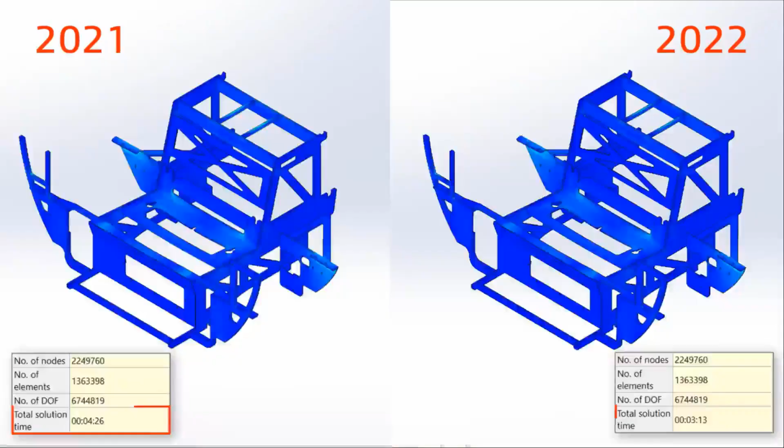Hello SolidWorks community. SolidWorks 2022 is just around the corner. It features many enhancements to help you work smarter, work faster, and work together. We have focused on quality and robustness, so your tools are more reliable than ever. And of course, many new features you won't want to live without.

This year we feature a long-time customer in the Netherlands, U-Boat Worx. This fall, they are launching their Nemo submarine. It is one of the most sophisticated pieces of underwater tech available to consumers. It's an award-winning, revolutionary design and personalized for individual use. We are so proud to be part of their innovation, as well as your next great project. For now, sit back and take in everything new in SolidWorks 2022 and the 3D Experience Works.

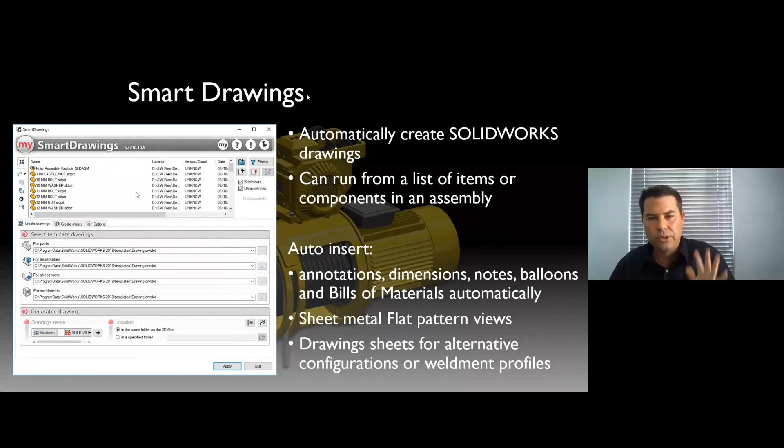So I just want to show you what myCADtools is and what it means to have a myCADtools app. This is a little application that can open, and this is a tool called Smart Drawings. This is one of the 50, and it automatically creates SolidWorks drawings. I know this sounds like what we've had with predefined views, but a lot of you would have identified with the fact that if you've got a predefined view with some model items, put a drawing view in, put a model in and throw some dimensions in, it's more of a gimmick than anything else. It doesn't really work.

So what Visiativ did with their apps is they actually went and created a full interface, and I'm going to show you how this works. It's really, really impressive. So what we've got is the app that we load inside of SolidWorks, and you can actually go in and select, add the current model that's open, so whatever SolidWorks model you've got open, it'll automatically bring it into the tool.

Now the tool also allows you to go in and select as many parts or assemblies as you like, and it'll go and bring all of its children across, and you'll be able to create drawings from those parts - sheet metal parts, weldment parts, assembly parts. It doesn't really matter. You can even go and select folders.

Then you've got options to create or use templates - templates for sheet metal parts, assemblies, and drawings - and you predefine that and use it for your company standard. Then we're going to look at ways to name those drawings, and again you have options for your naming conventions. Then we'll select where we'd like to place the location of those drawings after we've finished.

Now we've got selections for options for dimensioning. Do you want to use automatic dimensioning? Do you want to use model item dimensions? What kind of annotations for parts, assemblies, drawings? You've got a lot more control as to what kind of information you want on those specific drawing views. Then you can select from the drawing objects, assembly objects, dimensions, weldment cut list templates, location of templates, bill of materials templates, anchor locations. The amount of options is crazy for this, which gives it the power.

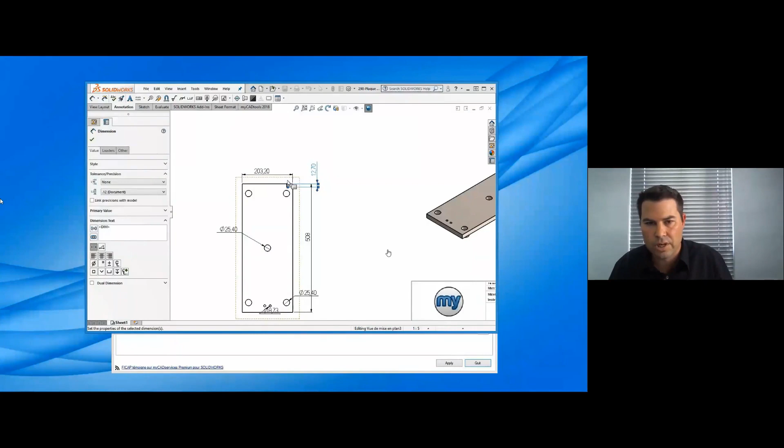So for real basic sub-assemblies, instead of letting your design team go and create all of these things manually, use a tool like this to push out drawings really quickly. I think you guys are going to get a lot of value out of that.

Then these are my two favorite ones: sheet metal manufacturing and cutting optimization. Sheet metal manufacturing takes a sheet metal part or an assembly with sheet metal parts in it. It goes in, opens up each sheet metal part, creates a DXF of that, and saves it in a folder for me.

So I'm actually going to do that one live. I'm going to move over to SolidWorks and show you how this works. If I've got an assembly here with some sheet metal files inside of it, there's a myCADtools app that you just start, and then you go to the button that says sheet metal manufacturing.

It's going to go look at the sheet metal files inside of my assembly. It looks at multi-bodies inside of the parts, so if I've got a sheet metal body with multiple sheet metal parts inside, it will extract all of those as well. You can see it actually lists it here as an item, and you're welcome to go look at a preview or open these up as you like. You'll see the quantities listed, the thickness, the material, and the configuration as well.

I'm not going to spend a lot of time, but you'll get the idea that I can go and select tons of options: file names, properties, how this thing's generated when pushing out a DXF file of all the sheet metal files. Do I want a DXF or DWG? What scale do I want? Do I want an isometric view above? Do I want the thicknesses grouped in a single file, or multiple files for multiple thicknesses? Do I want to export the geometry only, sketch lines, bend lines? It's really as easy as that, and you've got all of these options here, which I just push apply.

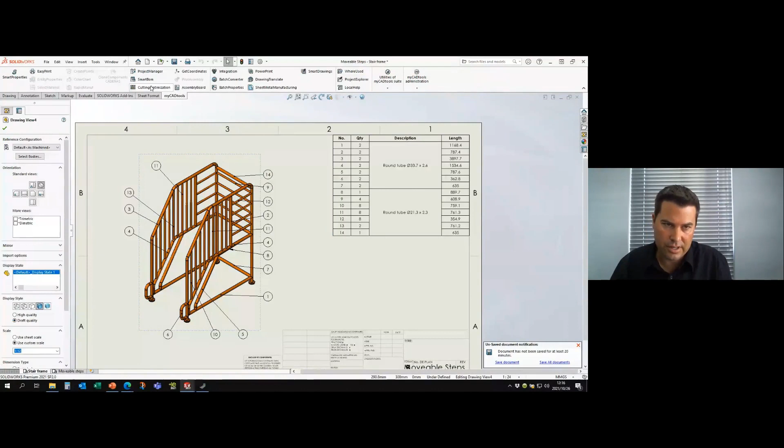And then you can go and make a new project and give it names and titles and project names and all those kinds of things if you like.

But I'm just going to go here and say import a SolidWorks table, and it's going to go and ask me for a SolidWorks weldment cut list here. I'm just going to select that, and it says there's a round tube there and a round tube of 2 different profiles, and I just say okay.

It says some of the lengths are the same, do you want to merge them? Yes, that's fine. And you will notice now that the tool has done this for me where it's asking me to have a look at the information of my cut length. So you can see I've got that profile over there and that profile over there with these amounts of lengths and quantities. Very easy.

What I'm going to do here is go and define the profiles. Each profile will have their own tab. And I can then say I want to optimize. I can buy material at 5 meter lengths and maybe up to 9 meter lengths - I've got a very generous supplier who can give me 9 meter length tubes. And then I need the increment in 500 mil.

So what I'm going to do is tell SolidWorks or myCADtools to go and optimally nest and figure out which is going to be the best size raw material to go and order. It actually tells me that 6 meters is going to be the optimal size that I need to purchase in order to nest those.

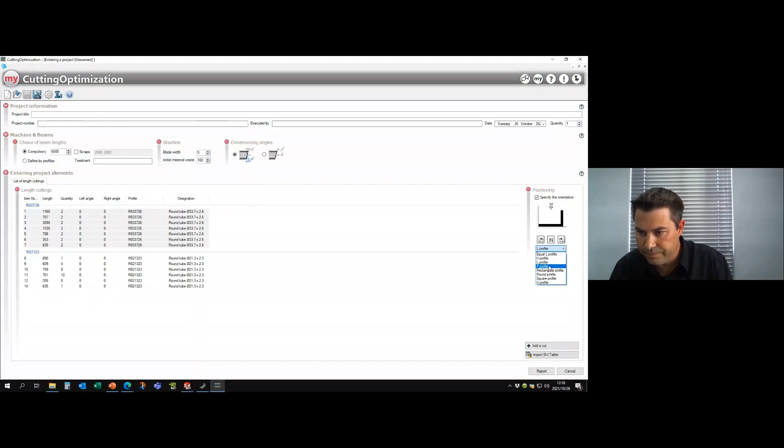Round. And I'm going to do round again. Then I've even got options to do blade width - I can choose the blade width of 5 mils, the initial material waste, so I can do the calculations of that. And then I'm just going to say report because I'm running out of time.

I just want to show you what this does - check this out. So what it's going to do here is give me a profile of my cutting. It's going to tell me I need 6 meter lengths, and these are the quantities. And then if I go down, it's actually going to nest the tube. It tells me I need 4 lengths of 6 meter tube, and I need 2 quantity of that length, and I need to put item number 3 from my bill of materials over there, and then item number 1, item number 5, and then it's going to nest it as well.

Item number 4, 4, 2, 2, 7, 6. And then it even goes as far as telling me how much scrap material I'm going to have left over per tube and in total.

So from a manufacturing point of view, I believe this is an incredibly handy tool. Instead of spending hours trying to calculate this by hand, you can use this to generate a cut list and provide this to your operations team. And that's really, really handy.

So that's a brief, fast introduction to the tool from my side. So what I'm going to do is stop sharing for a second.

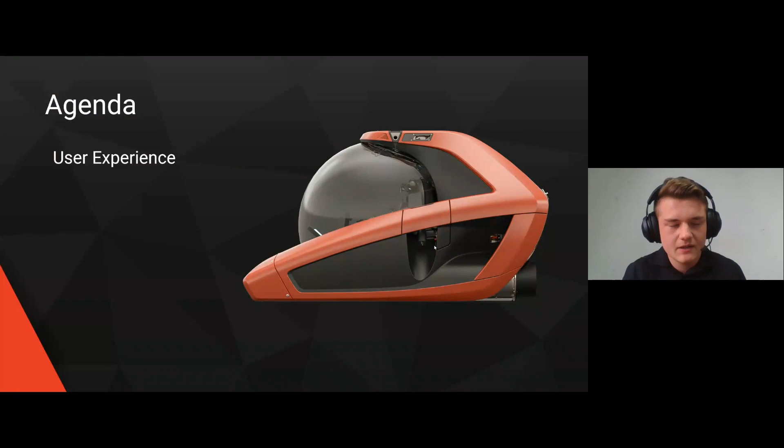So just to give you a brief agenda of what I'll be showing you today: user experience changes, parts, assembly performance, assembly features, drawings, imports, and finally our graphics.

So now diving into our user experience, you'll see what's new in 2022 is the ability to use the command search in your shortcut bar itself. There are also some changes to the coordinate systems, which will be shown, as well as the reference geometry shortcut, which I can tell you right now is one of the best additions in SolidWorks 2022. There have been changes to the system options info, dismiss messages, and our notification and message bar styles. You can now also view the progress within the pack and go feature itself.

In this case, I'm going to click the S key to access my shortcut bar, and by typing in coordinate system, SolidWorks will automatically show this feature for me. So now you don't have to go to your command search bar on the top right-hand side each time you want to search for a feature. You can choose to insert the command by itself or to show the command within SolidWorks. This is especially useful for those users out there who are just getting started with the program.

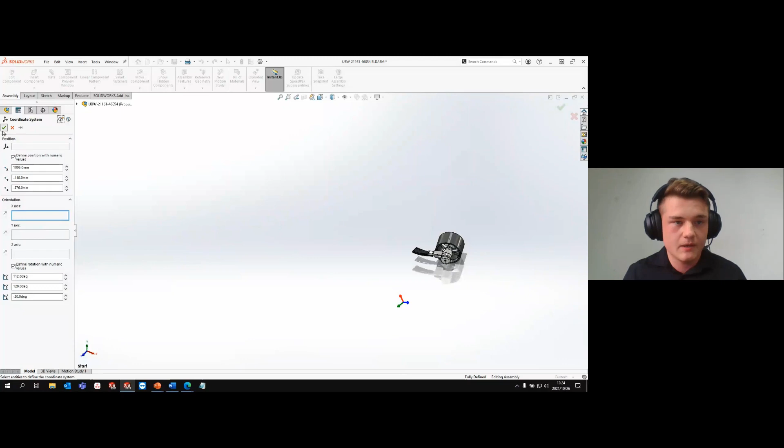Since I know it's under reference geometry, I'm going to select the coordinate system. You'll now notice in SolidWorks 2022 the ability to add your numeric values and rotation values to your coordinate system. In this case, I'm going to populate it with these rotations, since the team has gone ahead and worked out the exact position of our thruster. Notice how it changes as I insert these as well. By clicking OK, SolidWorks inserts this coordinate system for me.

Now, for those eagle-eyed among you, you'll notice some changes to the graphics aspect of the coordinate system. You now have these lines on each side of each axis, and this indicates that you can select a plane on your coordinate system itself. To show this quickly, I'm going to go to my heads-up view toolbar and select the coordinate systems option. By hovering over these, you'll see they actually highlight in orange. This allows you to select both the origin within the coordinate system, your faces, and your axes themselves. By right-clicking on the face, you can now add a sketch to your coordinate system.

Now you don't have to use your reference geometry and create a plane that way. SolidWorks 2022 allows you to use this method directly from here. But what happens if you have so many origins and so many planes that you don't want to use the heads-up view toolbar and select these options every single time? Well, now in SolidWorks 2022, if you press the Q key, SolidWorks will temporarily show all of these features for you. If you left-click somewhere else, it hides it.

So in this case, I want to add another thruster. I'm going to control drag this component, press Q, control select both the component and my coordinate system, and add my mate using the quick mates toolbar.

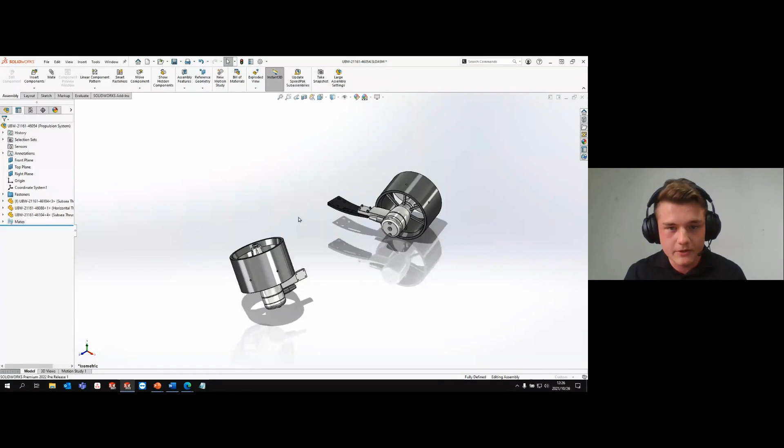Now to get it to the other side, I'm going to use my shortcut menu again, select mirror components, press Q, and select my right plane again. It's as simple as that. Right click and confirm the change.

Okay, but now the manufacturer also requested that he needs separate access to each file. Now we've all been used to using the pack and go feature, but what about the users out there who are working with these massive assemblies?

Well, now new in SolidWorks 2022 is the ability to see a progress bar on the bottom left if your assembly is busy with the pack and go feature. This especially makes it very useful for those users out there with massive 10,000 component assemblies. You'll now be able to see how far it is along the process. Click Save, and SolidWorks did that for you. In this case, it did go quite quickly because this is a very small assembly.

Now, just looking into the system options, as I told you, there were some changes to the dismissed messages. Under the system options in your messages, errors, and warnings tab, your dismissed messages are no longer located at the bottom. It's a completely separate tab, and this also allows you to hover over them, and SolidWorks will display a brief message to indicate what that message is all about. Just for those users out there who might not know what this entails.

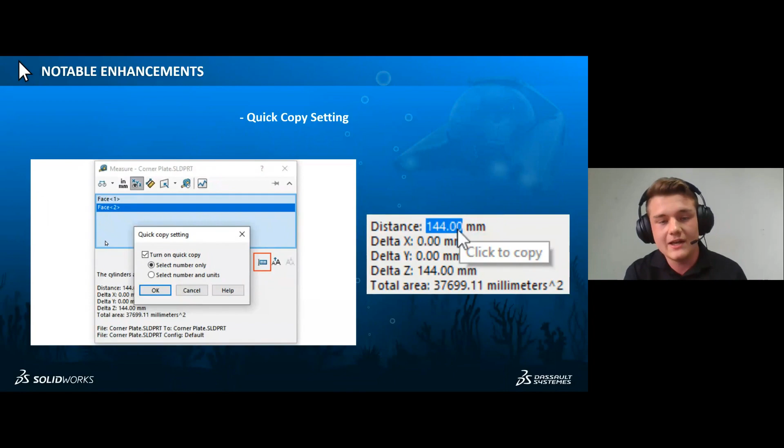The quick copy setting is finally back. For those users out there who use this in SolidWorks 2020, SolidWorks has introduced this again in 2022, now allowing you to copy the distance or the number only, as well as the units, by just simply left-clicking on it and copying and pasting it.

Before we continue, I'd like to take a deeper dive into your thoughts on the new coordinate system in SolidWorks 2022. Would you use the new coordinate system to create sketches? Feel free to answer this in the poll.

Me personally, I think it's a very interesting one. We've all been used to using reference geometry when creating planes, or also using our existing faces.

Quentin, what are your thoughts on this new coordinate system? I actually think there's a few enhancements as well for mating with coordinate systems in 2022. They're definitely listening to feedback from people, and I really like this. Coordinate systems get used a lot, and it's been many years since it's had an overhaul. This is very, very good, and it makes life easier for designers at the same time.

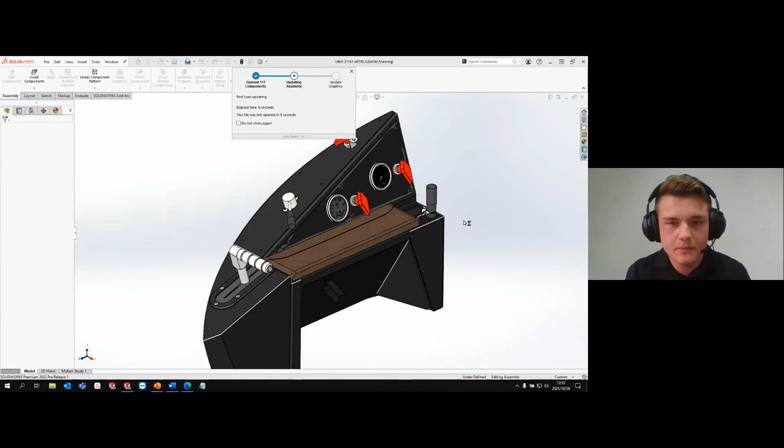To demonstrate this, I'm going to open up the dashboard located within the assembly of the Nemo. Just give that a second to open up. The Nemo was designed by a company called U-Boat Worx in Switzerland, and they design quite luxurious products.

Looking at these handles, they look quite simplistic, so they require some changes. I'm going to open up that part and start editing. On the left-hand side here, my solid bodies, you'll see these are BREP bodies. For those who don't know, BREP simply stands for boundary representation bodies, and this was imported from a STEP file.

Boolean operations are no longer required when working with these BREP bodies. To showcase that, I'm going to use my shortcut key, select chamfer, and add a chamfer on the right-hand side here, typing in 2 mils.

For those who don't know what Boolean operations are, it's simply the term used for when working with either dumb solids or general advanced part modeling techniques. If you want to learn more about them, feel free to come to our MECAD training where we can explain more about this.

Now we also want to add the logo here at the top. I'm going to select the sketch and perform a boss extrude of about 1 millimeter in depth. Notice how quickly it did that. I can now simply use one of the features in SolidWorks on a body or part that wasn't even made on this software.

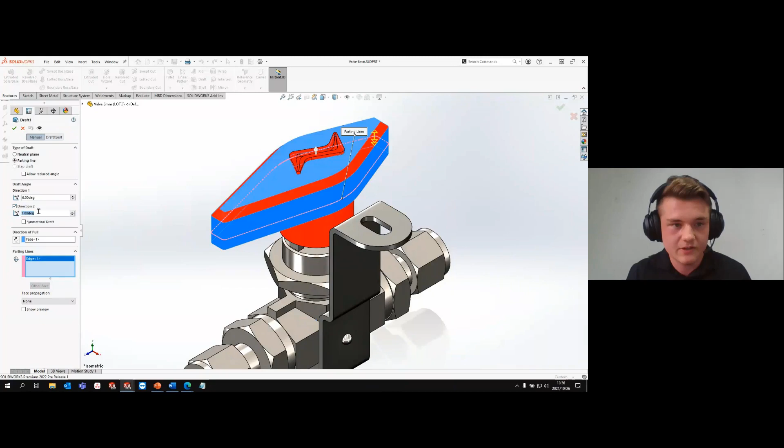Simply select your plane, select your face, and after it's been created, click shortcut, select draft. In SolidWorks 2022 you can now add your draft in two directions at the same time. By specifying my direction of pull and my parting line, in this case my split line, inserting my angles, 6 and 3, and clicking OK, SolidWorks automatically puts that in for me. No longer do you need two separate draft features—SolidWorks can do all of that for you in one.

I'm also going to add a hole here on the top, so I'm going to select my planes, click on plane 1, and select hole wizard.

Now new in SolidWorks 2022, when using the slot hole method, you have a new dimensioning scheme. You can choose between the centers or from the arc lengths. In this case, I'm going to specify my type, go to my positions, and select my location. By using the tab key, I can toggle between both the horizontal and vertical orientation within a few clicks.

Okay, in this case, let's try that again. Simply select your hole wizard, your plane first, and there you go. It inserts it for me.

In this case, I'll show you the hole then after these presentations. I'm going to save this and perform a brief pack and go of the part itself.

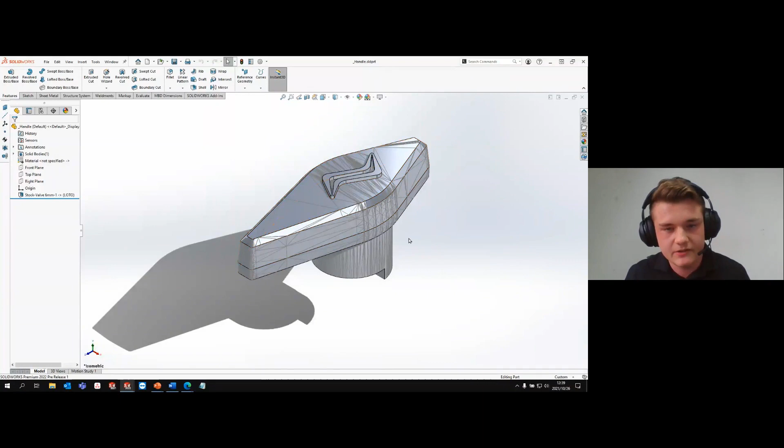So now quickly just to demonstrate what that looks like, I go to my pack and go folder again and select the handle option. It'll briefly display what this model looks like. Now you'll see these gray facets here on the right hand side. Currently in 2022, there is no option available to hide these facets. The only way you can hide them is by right-clicking on a face that's discrete in this case, and selecting the change transparency option. This is especially useful if you want to show your products to your clients briefly whilst you are in SolidWorks.

I'm going to save this and return to my assembly. Now I'm going to showcase to you the new sectioning method as well as the stud wizard. So for that, I'm going to select the handle, open it up, select my section method, and then you'll see here, new in SolidWorks 2022, you can now select a cylindrical face or an axis when viewing your models. It automatically updates as I move them, just like it would with the other sectioning methods.

Okay, this part does need some threading though. So I'm going to open it up and change the existing thread method that they have there. Now notice with these threads, for those of you who use the thread feature, it can slow down the performance of your PC. That's why we would recommend using your cosmetic thread features rather than the thread feature itself.

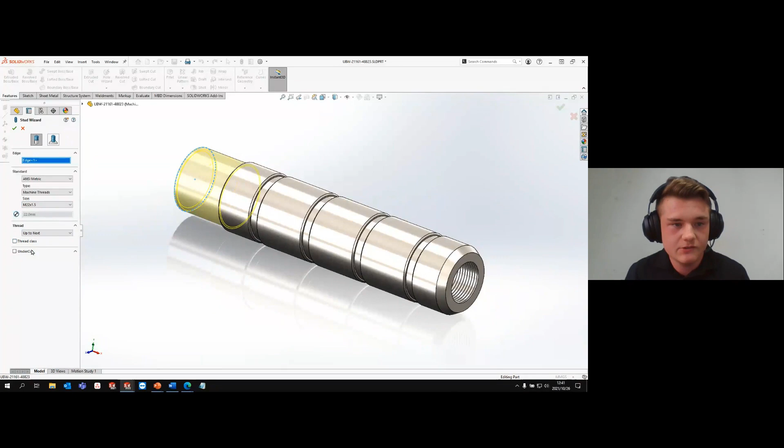So I'm going to suppress this, and under my features, hole wizard, I can now select the stud wizard option. Just by simply following the same procedure as you would with your hole wizard, you specify the stud options and the position. Now in this case, we have an existing cylindrical body, so I'm going to select this edge, and notice how SolidWorks automatically imports the diameter for me. Select my profile. In this case, I'm going to specify it to be M22 up to the next edge, and also insert my undercut. That obviously saves a great amount of time since you don't have to use your revolved cut method.

Okay, but what about the configuration change that I told you about? Well, if I go to my file properties, you'll now notice there are two new tabs: configuration properties and the properties summary. Under your configuration properties, you simply follow the exact same workflow as you would with every other property menu. Select your description in this case. I'm going to type in new thread. Specify it to be only in this configuration. Notice that's also a new feature.

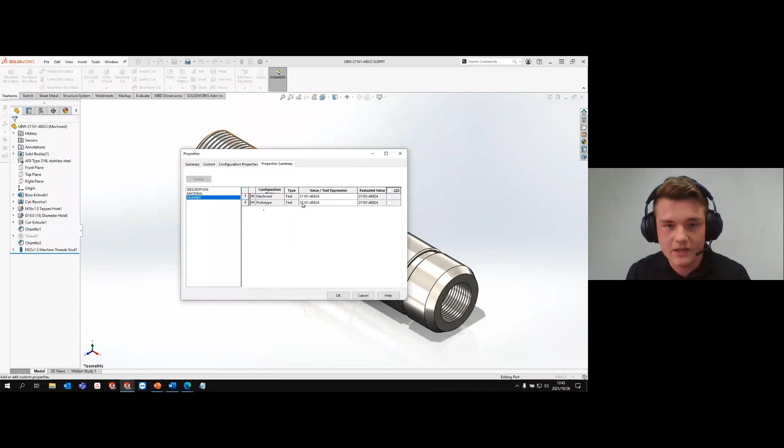And just repeat the process with my material. Select material. In this case, it'll be all configurations. Now if I go to my prototype, you'll see my description is not indicated there. Now, if you go to your property summary, it's basically the reverse. So if I go to my description, it'll show all the configurations associated with that property itself. In this case, I'm going to change the part number. In prototype, it's here. So I'm going to type in 5 at the end and click OK. It's as simple as that when working with the new configuration menu.

It makes life a lot easier.

Okay, I'm going to close these documents and return to my PowerPoint.

Now on to the structure systems. For those of you who don't know what structure systems are about, a link will be provided at the end of the webinar session. Feel free to watch that video to see what this is all about, especially if you don't want to add all these weldment features separately. Structure systems allows you to add all these briefly within a few clicks.

So in 2022, we have a new secondary members option to choose from, some changes to the gussets and end caps, and it's now also supported in structural members. We can also add connection elements now for bolted connection weldments, which is very useful. We can now mirror across two planes at the same time, and we can edit our sheet metal flange profile on a cylindrical edge.

So to demonstrate that, I'm going to open up the cradle for the Nemo assembly. Now, this member here at the back is going to experience quite a lot of force, so for that I'm going to have to add additional members to support it.

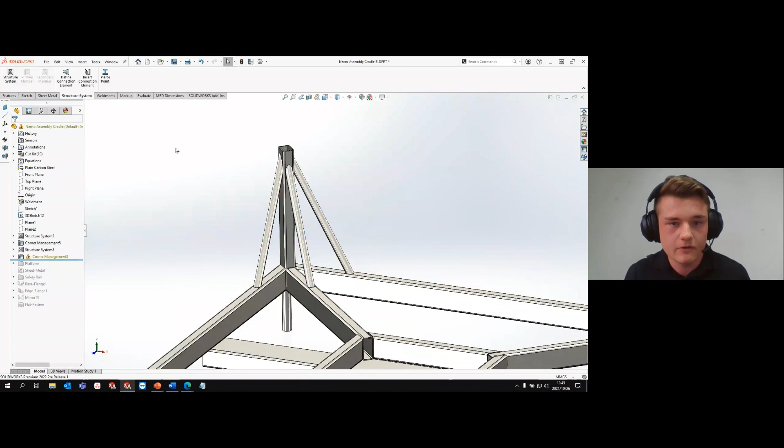By exiting this feature, it automatically goes to the corner management tool. I'm going to specify my trim type, change my trim order, and deselect the allow extrusion option. Now if I confirm that, you'll see within a few clicks it automatically adds these members for me.

Now, what about those connection elements that I told you about? Well, if I go to insert connection element, you'll see here on the left SolidWorks already specified these for me with the standard that they already gave. In SolidWorks 2022, a sample has been included, and there are various types that you can choose from.

In this case, I'm going to select my base plate. My size is plate 100. And then under my placement, you simply select the member that it needs to be placed on, and SolidWorks automatically puts that element in the center for you.

Okay, let's give SolidWorks quickly a brief moment to load. There you go, let's open that up again.

So if you want to change the distance or the dimensions of these elements, you simply pin it to add another one immediately, select your member, and then at the top of the placement property manager you specify your size. In this case I'm going to type in 150, and within a few seconds it automatically inserts that for me. That's especially useful if you want to change your connection elements on the fly.

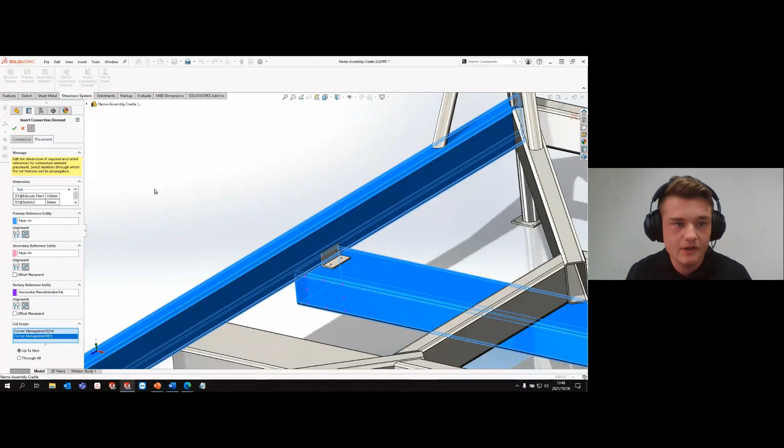By using my tertiary reference entity, by hovering over the member, I can simply select one of the reference planes that appear automatically, and SolidWorks will automatically put that in the center for me. By selecting my cut scope option, I simply click on both of these members and click OK. What that does is it automatically cuts into these two members, making them smart components in this case.

Now mirroring it is very simple. I'm going to use my shortcut menu, select mirror, and by using my new Q key function, I'm going to select the planes that I would like to mirror it upon, select my bodies, and click OK.

If you want to add your gussets and end caps, it's no problem in SolidWorks 2022. You simply go to your weldments, select end cap, and select the end of one of your existing members.

Now I'm going to have to mirror these as well on the other side. So I'm going to press Q again, select right plane, select my top face, highlight my bodies, and right click to confirm. And as you can see, with a few steps, it automatically put that in for me.

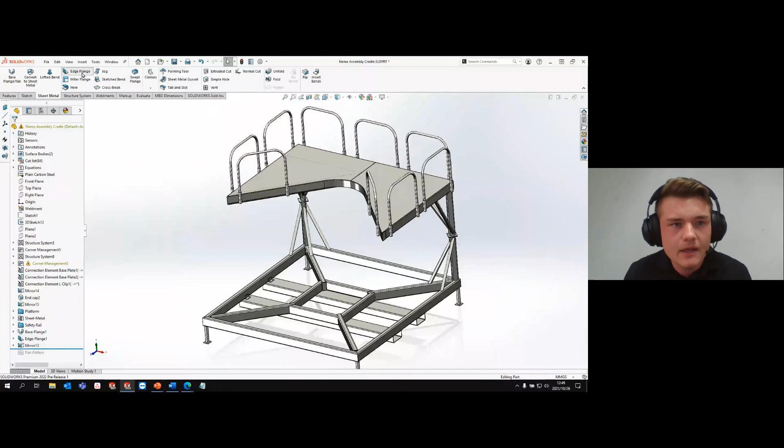Now, just while SolidWorks is loading, Quinton did mention in last year's event that you had the ability to insert sheet metal profiles on cylindrical edges. While now in SolidWorks 2022, you can edit these profiles immediately within the property manager itself. So if I go to my sheet metal and select my edge flange, I can select this option over here.

Select this edge, and now in 2022, you can edit the flange profile from this menu and click finish. How simple is that? It's so great to be able to edit these because now you don't have to flatten them, add your cut extrude, and then fold them back up again. It makes life a lot easier in this case.

Now let's wait for Solidworks to load again. And there you can see it automatically imported for me. I'm just going back to my PowerPoint.

There are some notable enhancements that I quickly want to go through with you. If you use edged contours on bends, it now is reflected in your flattened view in SolidWorks 2022. And this includes your inscribed text or your split line features.

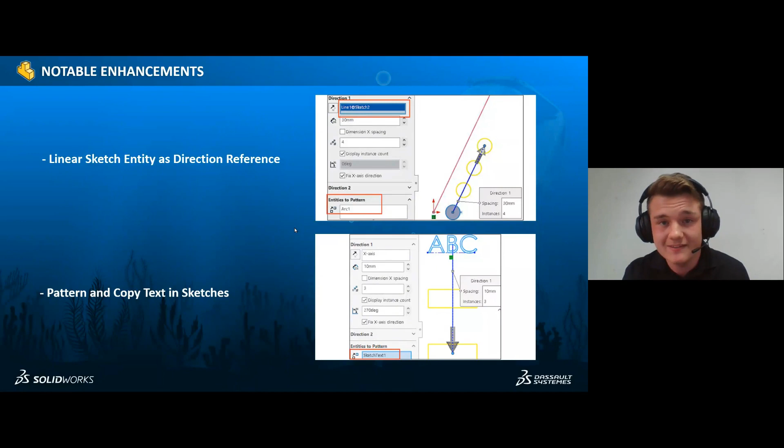If you select your linear sketch entity as a direction reference, it now does not put it in your entities to pattern in SolidWorks 2022. So for those of you out there who use other sketches as reference, you can now immediately perform a pattern using an existing sketch entity itself. And this also includes your copy text, where you can copy existing text within your sketch pattern itself.

There's also additional redo support for parts. So when performing redos, you can now redo changes to the hole wizard, your simple hole, and your linear pattern. And this also includes changes made via the instant 2D command, your reorder features, and your rollback bar. Very, very great stuff, and I'm sure a lot of you will love that new addition.

Now, Quentin's going to launch another poll. I'm interested in hearing your answer for this. Have you ever broken your model using the undo button? Now, I think a lot of us have done that in the past. I'm also guilty of this, especially when showing quick features to your clients and you don't want to close the part. You just want to perform general redos after you've undone them about 1,000 times. SolidWorks did add the additional redo support there for you. So just let me know on the poll and I'll have a look.

Brandon, the guys, we've had about 30% are saying, wow, yes. And then about 60% have said, yes, it lit up like a Christmas tree. And then only 5% of you say, what is undo? I'm a machine, I never go back. Oh, that's awesome. Okay, so there are people out there who would love it. Okay. Awesome. I'll give you about 10 more seconds to answer that, and then I'll move on to the assembly portion.

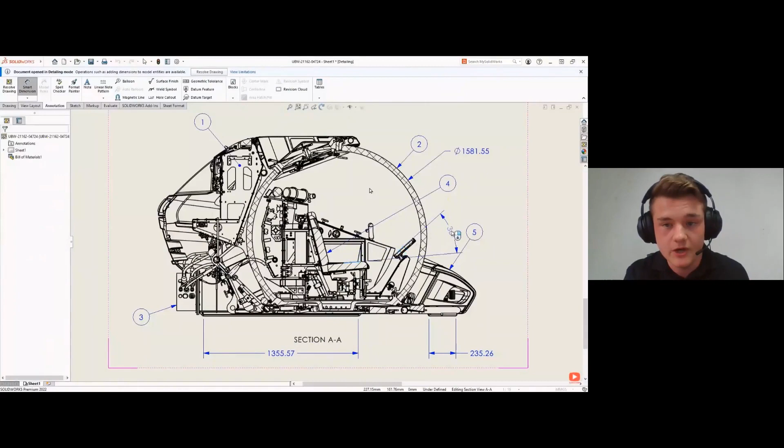Detailing mode also allows you to insert your brief smart dimensions, as you can see here, as they indicate. This also includes your notes, balloons, surface finishes, blocks, and even your tables, which will also be shown as a new addition to drawings, where you can add a whole table within your detailing mode itself.

Now, new in SolidWorks 2022 is the ability to open up your subassembly within LDR, just saving you a lot of time. But it gets better: you can open up your subassembly within resolved or lightweight mode whilst you are in LDR, making it a lot faster when working with these assemblies.

That's the assembly performance. Moving on to the assembly features: if we left click on any component, the move with triad automatically appears. We have changes to the quick mates control, as well as the ability for SolidWorks to automatically determine the seed instance for your pattern-driven component pattern feature. We also have the new configuration table, which was highly anticipated and requested, as well as the exclude component from BOM option, which is in the part itself.

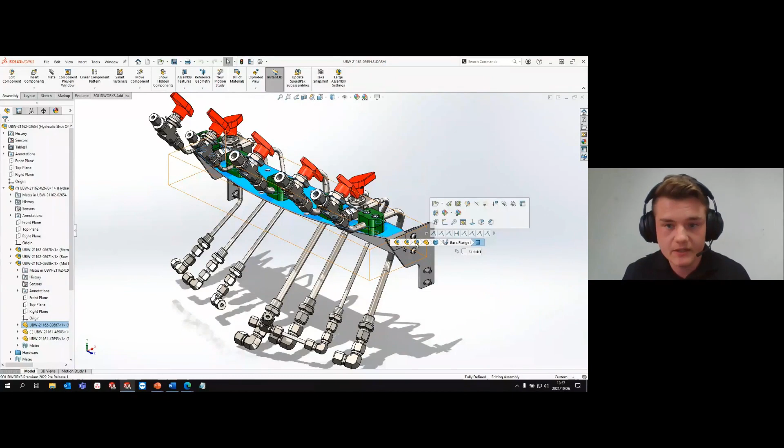So by going back to my SolidWorks, I'm going to open up the piping system within the dashboard itself. This system does require some changes, so I'm going to select this component. For those of you wondering why this breadcrumbs menu is appearing by default, this can be changed within your system options, and you can always press your D key if you want to show it wherever you are clicking.

So using the breadcrumbs, I'm going to open up the subassembly. By clicking on the components on the left and dragging it using my controls on my move with triad, I can move it three-dimensionally and rotate it at the same time. Now you don't have to right click on your component and select your move with triad option anymore.

Now, if I want to add these mates, I'm going to use the control select method and add my coincident mate using the quick mates toolbar. New in SolidWorks 2022 is the ability to confirm your mate immediately after you've inserted it, so this menu doesn't disappear like it usually would. It stays here until you've confirmed your changes.

I'm going to repeat that again. I'm going to add another mate to the hole over here and specify it to be locked in this case. Same goes with this component over here, where an additional copy needs to be made. By control selecting both these faces, I can add this concentric mate and choose to lock the rotation itself. I'm going to add another mate to the face, flip the direction, and click OK.

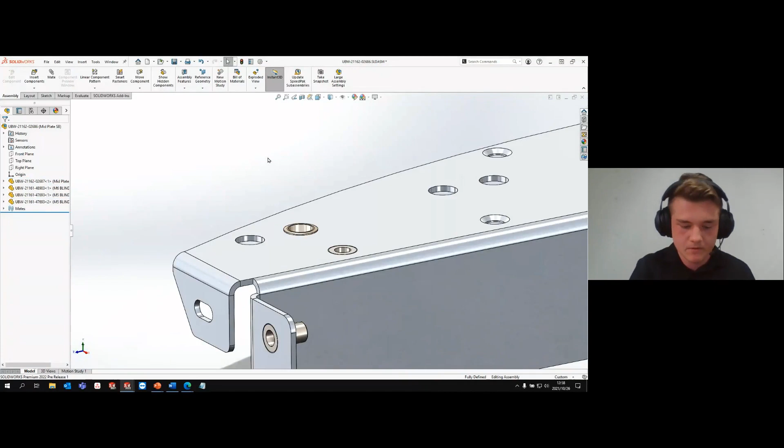Now for that linear feature that I told you about. If I go to my assembly tab under linear component pattern, you'll notice the pattern-driven component pattern feature. If I select this component, right-click, and select the holes where I want this component located, SolidWorks automatically determines the instances based on my selection. Now in SolidWorks 2022, regardless of where you place the seed component in each of these holes, SolidWorks will still recognize where to put it for you.

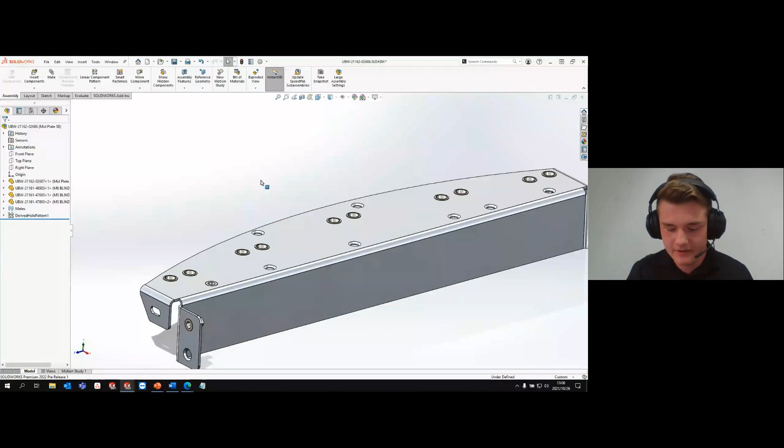To demonstrate that, I'm going to select this component again, edit the mate, select this hole over here, and then access my pattern-driven component pattern again. Click Confirm, and repeat the process with my other fastener.

Now this can also be done to components who also need to be mirrored. So if I go back again, select my feature, and select the hole on the bottom left here, you'll see SolidWorks will automatically determine where to put that component for me.

With that change made, I want to demonstrate the new design table, or the configuration table, in SolidWorks 2022. By adding my extra configuration and typing in primary system, and clicking OK, I can still go ahead and suppress my features or my components as you usually would. Remember that you can change the configuration of your part immediately within the tree itself. In this case, I'm going to suppress all these components.

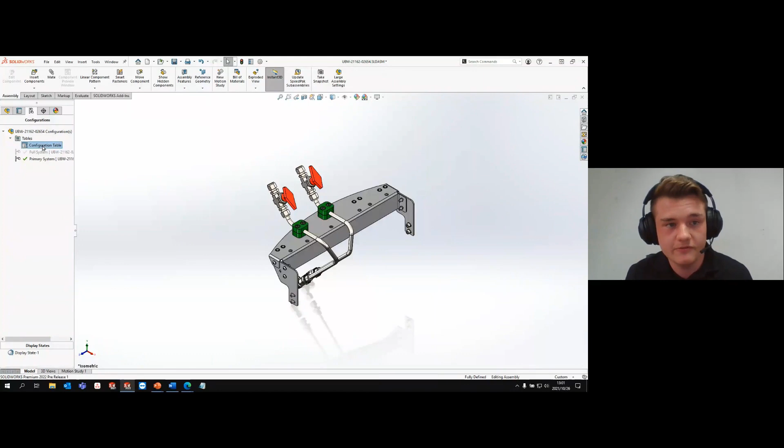There's some hardware that we don't require anymore, so I'm going to suppress those. If I go back to my configuration manager, under the tables dropdown, you'll now notice the configuration table is automatically imported for you. If I right click and select show table, I can now see all my configurations, and I can add an additional one.

In this case, if I type in emergency system and click enter, it automatically creates that for me. This also allows you, by right-clicking on it, to rename, delete, add a derived configuration, or to switch to it immediately. So in this case, I'm going to suppress all these components, change the configuration to emergency system in this example, and click apply. No longer do you have to go to your feature tree and manually select your suppression states. SolidWorks can do that for you within the configuration table itself.

Now, in my emergency system, there are some components that I don't need anymore, so I'm going to select each one of them and select suppress. All these changes that you make in this assembly are automatically recorded in your table, so you don't have to worry about that aspect. If I go back to my configuration table and show it, SolidWorks will automatically import the changes I have made to these features, similar to the design table.

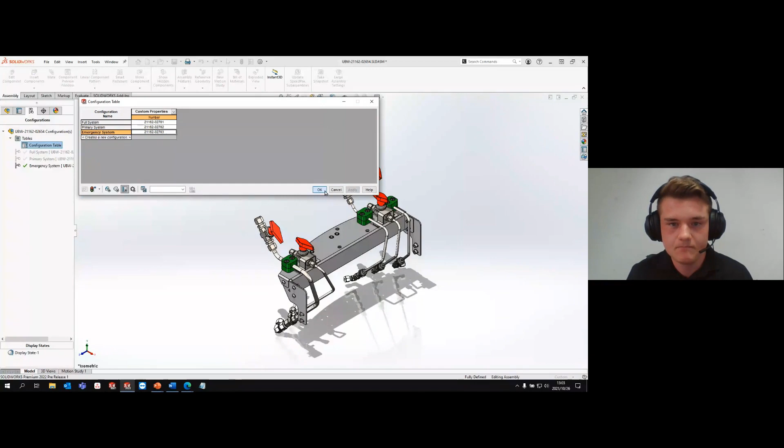Now, what happens if it gets too cluttered? SolidWorks added these components here on the bottom left for various sketches and features, components, custom properties, and your configuration parameters. So if you want to change your part number, for example, I can just choose the custom properties filter, and within a few clicks, I can type in my new values and click apply. Now if I go to my other configurations, you'll see it'll automatically update as it would usually.

Now for the bill of materials changes. If I click on the dropdown here of my tables on my feature tree, and right click on my BOM, I can show the table in a new window. But notice if I select all these parts, it automatically highlights them for me on the right hand side, apart from the component that I selected now. This is because of the component properties option called exclude from bill of materials that was selected.

Now, for those of you who work with this every single day, hiding and showing your components like this in your BOM, you can now automatically do that with each part that you insert in your assembly. So I'm going to open up this part, go to my configuration manager, right click on my property for my configuration, and then I can set to exclude it from my BOM when inserted into my assembly by default. So now I don't have to do that each and every time I make a brand new assembly.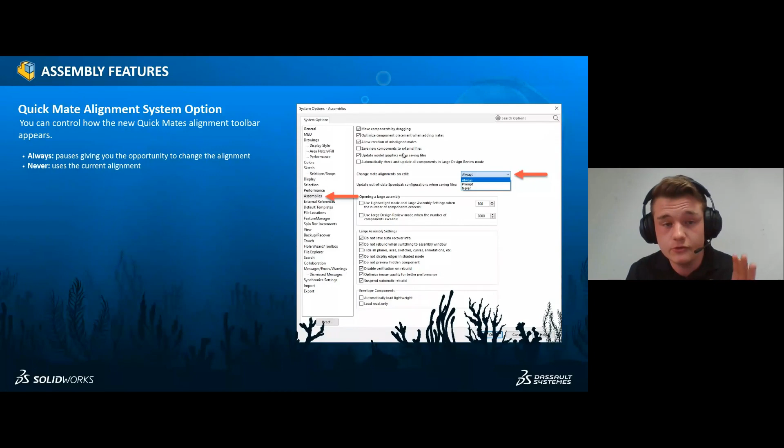Okay, so in this case, I'm going to close it and return back to my PowerPoint. If you want to access your various quick mate alignment options, you can go to your system options and choose to show it always in 2022. In a nutshell, these were very, very useful features that were added in our assembly environment, and I trust that a lot of you will use this quite frequently in the new version.

Now, there were also some changes to the QuickMates context toolbar. You'll see in 2022, if your OK button is not showing, just remember to right-click at the top of your menu, select Customize, and then under the context toolbar menu, just choose to show your OK button over there.

You can also automatically load component data within your assembly, and this can be specified in your system options again. What this does is it basically hides the options for selecting your lightweight or your resolved modes in the assembly environment. Manually manage resolved and lightweight modes is your usual assembly feature that you would use. You can also exclude failed components in section views by simply selecting the option that appears on your screen if your section view is tangent to a cylindrical face, which does happen quite often.

Now we're going to have another poll time quickly. Do you use the design table when designing in Solidworks? The reason I'm asking this is a lot of our clients contact us asking for various assistance with regards to making multiple configurations at the same time. By using the design table, you are able to completely add, let's say, 20 configurations by just clicking your button a few times and by copying and pasting it in your Excel table. So just let me know, and then I'll have a look afterwards. I'm interested in hearing your answer.

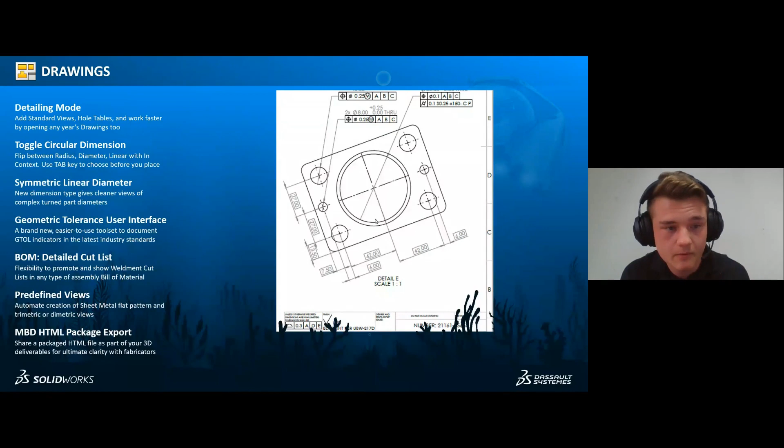In this presentation, you'll see there are a few changes made to the detailing mode environment. Off the bat, you can now add hole tables within your detailing mode environment, and toggle between different circular dimensions. There's a new symmetric linear diameter dimensioning method, a brand new geometric tolerance user interface, which will be shown now, plus the ability to add a detailed cut list in your BOM, flat pattern predefined view, and the ability to export HTML files from your 3D PDFs.

So by going to SolidWorks, I'm going to open up the drawing here on the right in my detailing mode environment. With this drawing open in my view palette, you'll notice there are some views included to this model. If I go to my second page and select my view palette, I can drag and drop my views within a few clicks.

This is possible because of one setting in document properties. If I go to my performance option, you'll notice the setting was moved from system options to document properties, and you can save model data in your drawing and include standard views in your view palette.

So if I go to my first page again and select the drop down of hole table, I can now add my hole table within my drawing immediately in detailing mode.

Now here is where things get interesting. You can open up a drawing from any version in SolidWorks by using the detailing mode in 2022. In this case, I've opened up a drawing from the year 2010, and we don't have access to these files anymore. But as you can see, it has imported successfully, and it's quite fast as well.

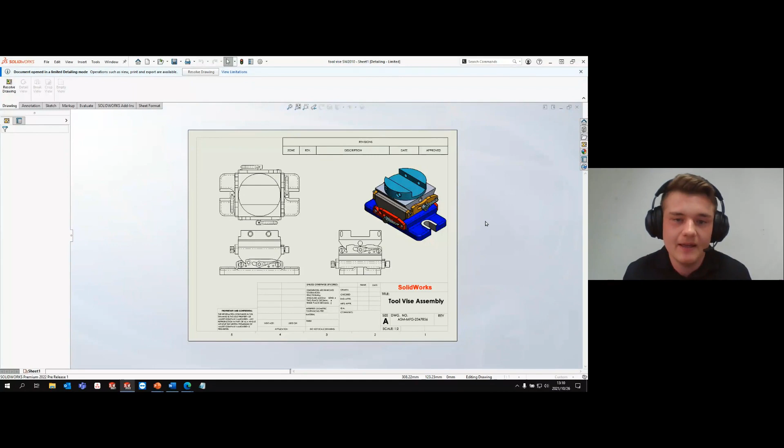So if I go to my view palette, it's not included in this case, and I cannot add specific annotations to this part here. This also depends on the year in which it was saved. For example, if you saved this in 2016, you'd be able to add smart dimensions on existing entities. And note, you're able to export these drawings in PDF format as well, just to show that to your clients.

So now if I go to my other drawing and open up the cylindrical part of the assembly, I can add or change my dimensions within my drawing environment from being radius, diameter, or display as linear by simply left-clicking on my dimension and toggling that option.

Very, very great stuff, but it gets better than that. If I go to my dimensioning types, I can add my symmetric linear diameter dimension to my part. So if I select my single option here on the left, select on my axis and select a point, SolidWorks will automatically add that cylindrical dimension for me.

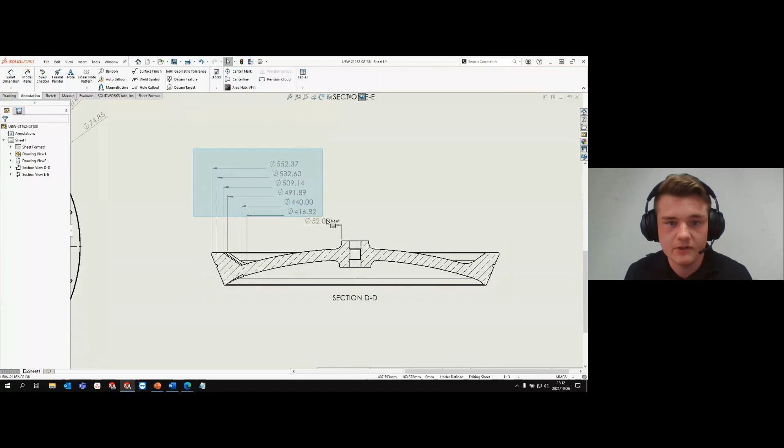And there are multiple methods. If I go to my multiple mode by clicking Alt-M, I can select my axis and multiple points at the same time, and SolidWorks will automatically import them and position them, as you can see over here. So if I want to rearrange them, I can just drag along this toggle and it'll automatically realign them for me.

Now, the other major addition to SolidWorks 2022 is the ability to have a detailed cut list within your drawing environment. This part over here consists of about 3 main weldment components, and I want to add the cut list of the assembly within one BOM in SolidWorks.

So if I go to my BOM over here on the left, under my BOM type, I can select indented and select the detailed cut list option. This was available in 2021, but now in 2022, you can select the detailed cut list option with your top level and your parts only selected. This takes the cut list of all 3 components and inserts them into one bill of materials table for you. So now if I click OK, it automatically imports that for me.

If I go to my drawing on the right-hand side and choose detailing mode, you can also add flat pattern predefined views to your model. This is what your model would look like if you showed the flat pattern of your drawing, but you can also separate the bend lines of the part by going to the heads-up view toolbar and selecting the view bend lines option. It used to be under sketches in 2021, but now in 2022 you can toggle them separately using that option.

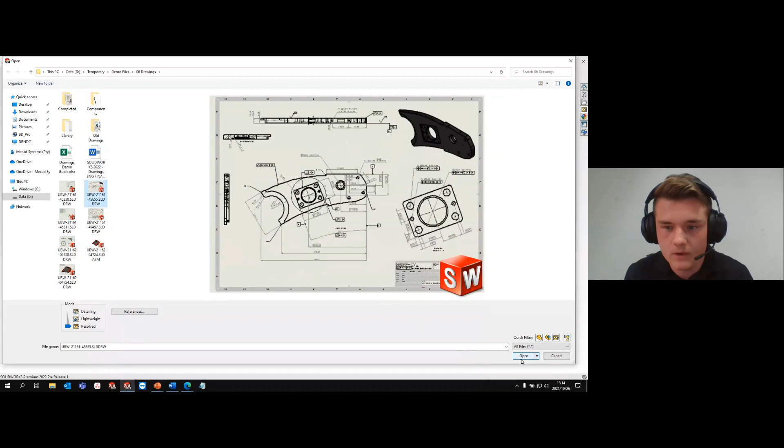And then finally, we can now also add another geometric tolerance to one of our parts by selecting lightweight mode and opening up the drawing from here.

So now if I go to my geometric tolerance, you'll notice a brand new interface if I select any edge. You'll be presented with this dialog box where you can simply select your tolerance method. By going through various tolerancing steps, you can add your ranges, offset zones, features, all the way up to your symbol. Under my range—please don't crucify me, I'm no GD&T expert—if I double click and add my range, it'll automatically import that for me, so you don't get this massive dialog box appearing in your graphics area anymore.

Adding datums is simple. You simply select add datum and specify your values. If you want to edit them, double click and you'll see blue arrows appearing on each side. Select the option, then select new frame in this case, add my new tolerancing method. Let's add 0.25 again, go to my material condition, select maximum material condition, and click done. It's as simple as that—simply click add, and you can also remove your mistakes if you make them.

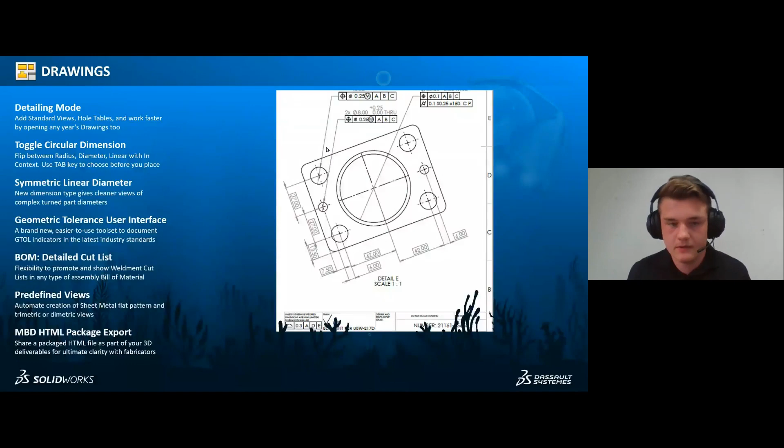Here we can see the detailed cut list option, which was explained earlier. We can now select your top level only and your part level only within the BOM options itself. And then you can obviously save your 3D PDF in HTML format after you've completed your process.

You can also crop an alternate position view in SolidWorks 2022. And balloons for sub-weldment cut list items will now show correctly when working with 2022—you'll no longer see these asterisks anymore. The display style has also been changed in your BOM within 2022. And that is it for our drawings aspect.

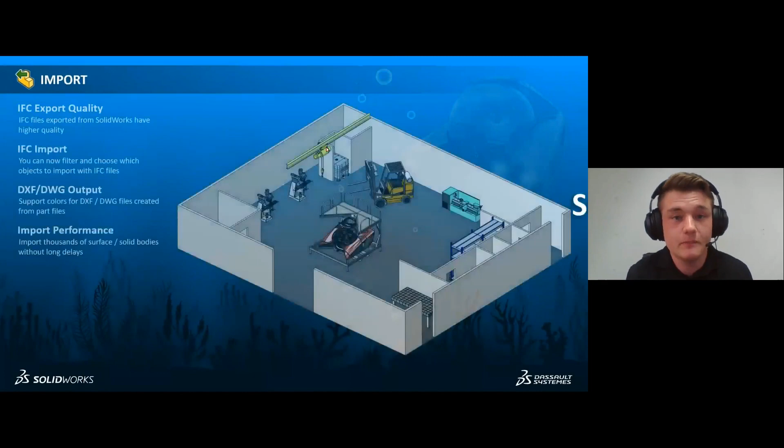Moving on to import very briefly, I've included a video just showcasing some of the new import capabilities. When working with IFC files, if you export them, you can still export them with various units—in this case they specified inches. But where it gets interesting is when you import these IFC files: you can specify which geometry or which bodies to import by selecting your import settings and choosing your various classifications for your IFC files, just to import the necessary information for designing in SolidWorks. After giving it a few seconds to open up, SolidWorks will open that IFC file by only importing the most relevant forms of geometry.

One of the great new additions in 2022 is the ability to export DXFs in color. This is very useful for the SigmaNEST users out there. By simply clicking on your DXF or DWG output, you select the sketches option, and by indicating different manufacturing processes such as your lead-ins and lead-outs, you're able to indicate that now with a few colors in your sketches.

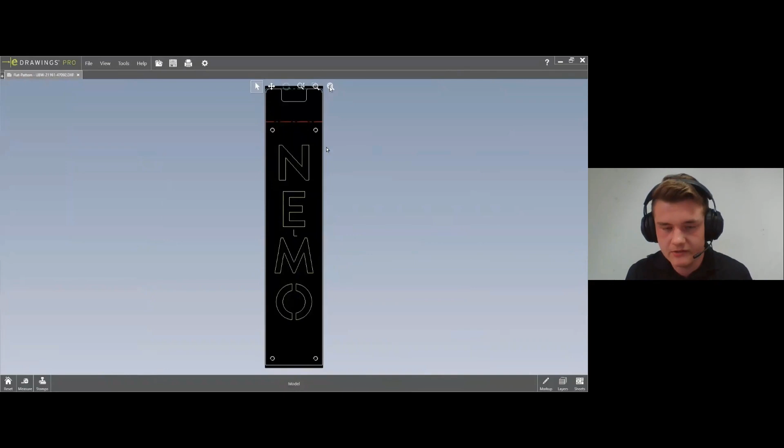Note this does not work when working with splines, and when using text you have to use other sketch entities such as the line tool or the cylindrical or circular sketch entities. This also works with your center line in this case. Very, very useful stuff. You can also export your e-drawing file properties within SolidWorks.

We don't have a lot of time, so I'm going to quickly move on to our graphics aspect and showcase to you the new additions to 2022.

When working with lightweight mode in assemblies, your textures now automatically stay updated, whereas in 2021, it would only stay updated in resolved mode. There were some changes to the cosmetic thread displays, some new additions to our 3D textures, and our silhouette edges performance has been increased dramatically.

So to showcase this, I'm going to go to SolidWorks and open up the chair assembly. But before I open it up, you'll see this one chair here on the right is dark brown. Now this has to be changed since the customer specified a different color.

So if I go to my components and select the chair, I can simply delete the existing texture as you would with 2021. Go to my drop down, select organic in this case, and switch to my leather mode.

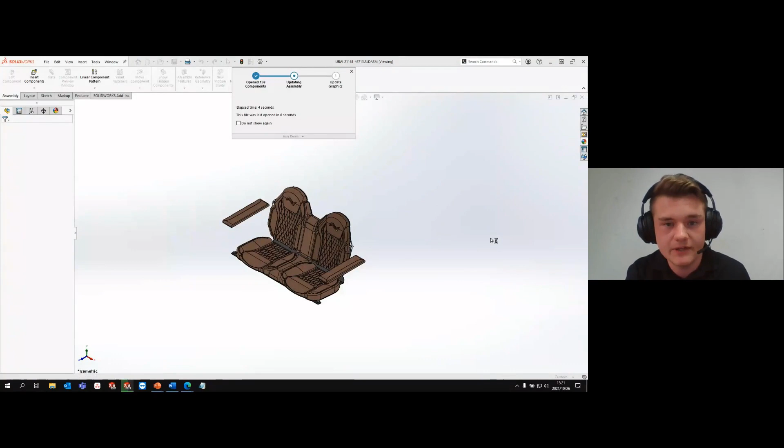But now we also need to change the texture options for our knob. So I'm going to open up this component quickly, and by importing my appearance from the miscellaneous tab, 3D textures,

and selecting the knurled bump 10, I'm going to select on the face that I would like to specify, edit the appearance, and change the magnitude of the bump appearance.

And if I type in 3D texture, it'll automatically import a texture or create a texture based on the appearance that I specified. Well, now in SolidWorks 2022, they increased the performance of this tool, so your maximum element size can now also be defined to be as little as 0.03 in this example.

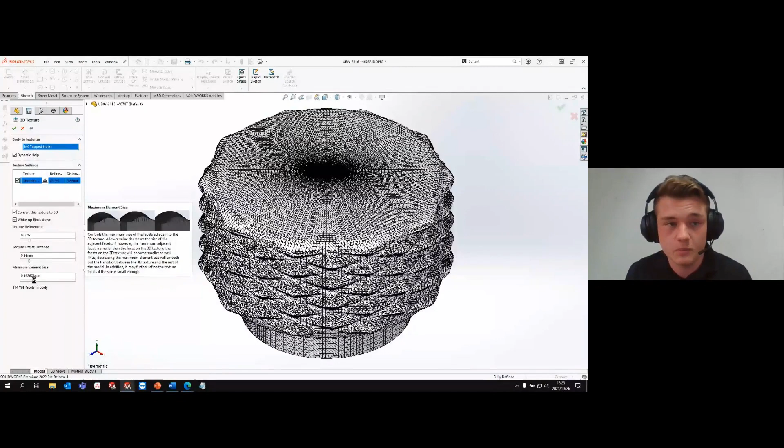But in this case, I'm going to keep it low since it will take quite some time to render. And by saving this and closing this, SolidWorks will automatically put that in there for me.

Now, do note that if I use my cosmetic thread feature, it's automatically included in my stud wizard, my hole wizard, as well as the other features that use the cosmetic thread as well. And this does change according to the appearance that you insert. So this also makes your performance a lot faster if you don't want to show your thread features. Keeping the graphics triangle display low on your component is always a top priority.

Now, just a quick comparison before we end off. The silhouette edge performance - let's just go through that again. There you go. In 2022, the silhouette edge performance has been changed quite a lot, with the average FPS having been increased by about 11%. So your performance will be a lot faster in SolidWorks 2022.

And those were the additions from our user experience up into our graphics. If you have any questions, feel free to ask them in the chat, and I'll gladly answer them as we go along.

Brilliant. Thanks, Brandon. Super job. Well done on your first presentation.

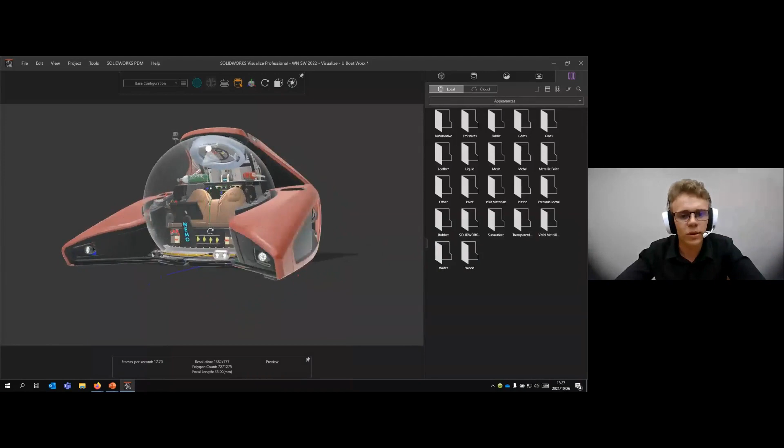Okay, so now going to Visualize. I've got this beautiful U-boat open, and you'll see I switch from preview to fast to accurate mode a lot. I'm simply doing that for performance. It's very easy to just switch quickly using 1, 2, and 3 to switch between the modes. Okay, so let's take a look.

We are going to add an environment here because we need to make this actually look real. Having this type of marketing collateral from day one of the design stage is priceless. Honestly, it's going to give your clients, your customers, so much more interest into what they're getting themselves into with investors. You can show them, listen, this is happening, look how awesome it's going to be. Give us money, I mean come on, that's awesome.

So now I'm just going to add a quick HDRI. Now it's been long since supported by Visualize, the HDRI scenes, call it bubbles basically. You'll see that because it looks like a little 3D bubble that you go into. So now this has the perfect light source for us, the perfect little sun.

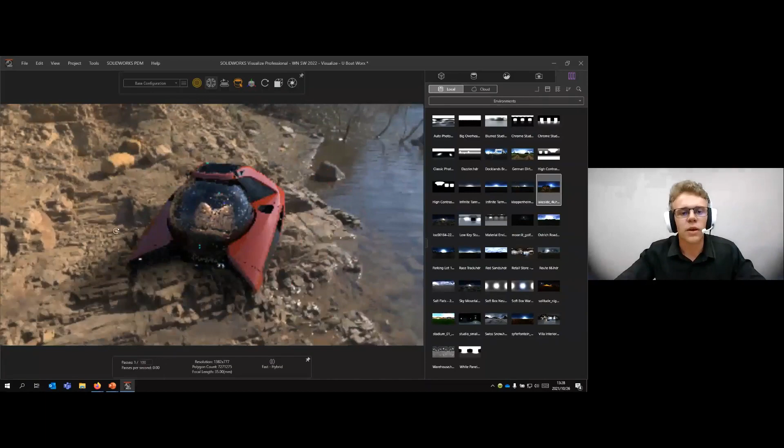But we don't necessarily want to be on a rock near a lake. We want to be on the ocean, on a ship or something. With normal still 2D images that's so widely distributed now as stock images, it's very easy to get your hands on one of these. We call them plates, as in backplate. So again, it's simply drag and drop operations. Can't get better than that.

Okay, so now that we have this, it's looking good. We are going more toward commercial clients on this one. What we need now is the perspective.

Now anybody and everybody who uses Visualize or previous versions will know that the most difficult thing about a backplate or still image on the back is getting the perspective of the model and the backplate to match. It's honestly constantly a hit and miss. Although not that bad as I'm making it seem, but I'm very dramatic, so bear with me.

Now with Visualize 22, we can simply say match camera. This is very cool. What it does is throw a bunch of lines on your screen, displaying the horizon, line extensions, and the vanishing points. This will very quickly and easily allow us to line up our horizons using the horizon and some of the ship's features to get that perfect.

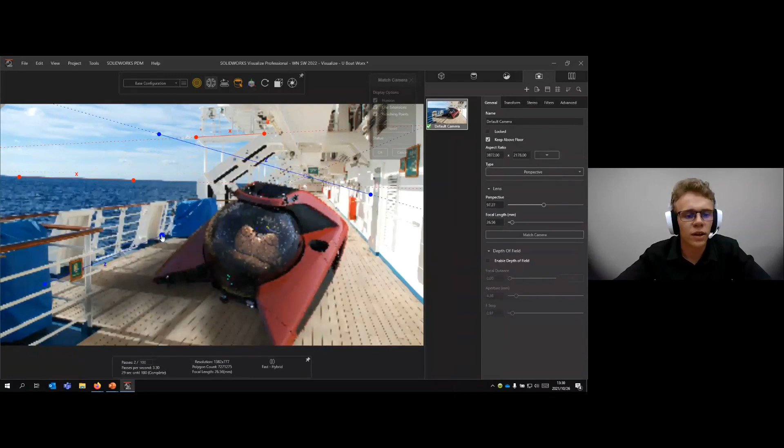And we can use these on the Z-axis, line it up with the ship to get it perfect. And like the name says, it matches the perspective exactly. Okay, and you'll see now it's fully defined. Perfect, and there we go. It's literally as easy as that. I mean, come on, that's amazing.

Okay, so next step, we need to make sure the shadows actually align with the backplate shadow. It's going to be weird having two sun sources or light sources. So all we have to do is, just as in previous versions, select the HDR scene we added previously, and simply rotate it until it matches with our shadows. Looking very cool.

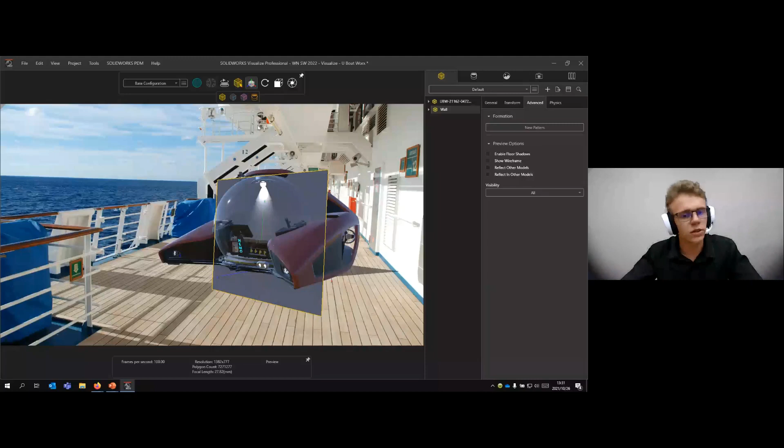One small detail, one issue: you'll see that the shadow of the Nemo kind of bleeds off to the right, and it's not capturing that wall of the ship that we have here. So what we'll need to do with Visualize 2022 is add some primitive geometry using our project models, new model, and I'm going to choose wall. In this case the wall brings in primitive geometry of literally just a flat plane, and I can then manipulate that. There we go.

So this is honestly going to take the longest time, and it's not even that long. Just line it up, move it until you are satisfied. See, move it a bit up.

There we go. Okay, so now with Visualize 22, we can use this primitive geometry - that's the primitive geometry that's everything on here that you can add directly in Visualize. So now what it does is it takes the primitive geometry and it literally catches the shadows. That will allow us to position this, for example, this wall, and we are going to use this as a shadow catcher. Okay, so we're just going to go to General, and now you'll see - oh, no, not this one.

We are going to select our wall part, and then - okay, where's my geometry now? Okay, so let's just try that again. Might have clicked something different now. New model, wall, pop this in, just position it.

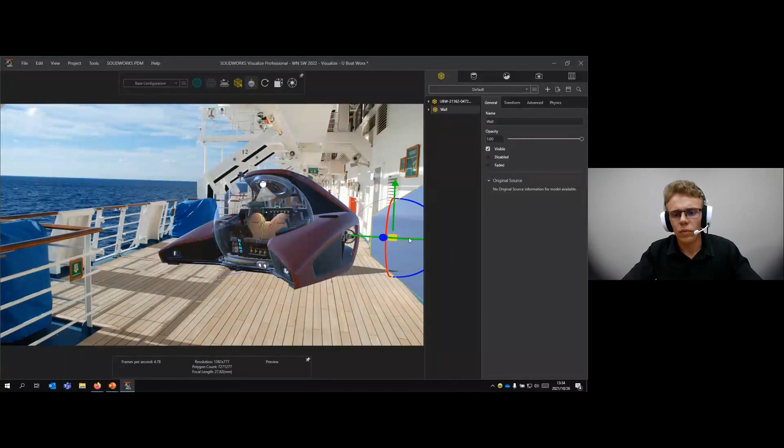Okay, like I said, the moving of the model is also a lot easier, a lot faster, as Ivan mentioned now. Okay, just find a detail.

There we go. Okay, so now that we have our primitive geometry, you can, like I said, go to the part, and we can say shadow catcher. So what this does is it removes the model geometry, and it only captures those shadows of the actual part of the model from the light source itself. So you'll see I can just simply move it around, make sure that it captures those details, and there we go. That's perfect. It's honestly, I love this. Like I said, I don't have a favorite feature that's been added. Everything is just amazing, according to me.

Okay, so now we need to capture this Nemo, we need to capture it in the natural habitat - so underwater, obviously. Again, I'm just going to drag and drop the backplate on there, another still image. Going to add a new camera called underwater.

Okay, and now I'm going to start making use of configurations. So configuration is also very, very powerful. We're going to call this underwater again. Yeah, so now any changes we make now will reflect into the configurations. What we can also do, I'm going to add another environment. For now, the Dazzler would look good - I use that most because I love the reflections, the light source is very even.

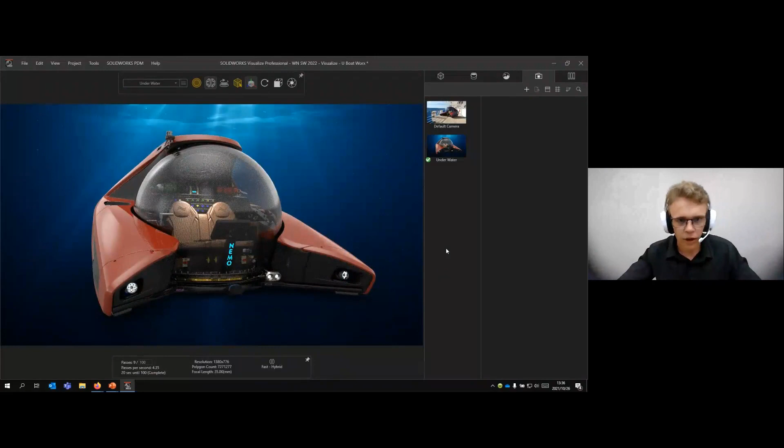If we can now position this, get the correct perspective, line everything up - looking pretty cool. Okay, so now what I like to do is a bit of a tip. I'm going to add a new camera and call it free camera. This will allow me to actually work with the model, and then I can lock this final view of mine. So now I can position everything, look around, position all of my external assets like my lights, look at the scenes, all of that stuff without affecting the actual final camera that I'm going to take.

So very, very quick and easy to add a light. Going to position it there, right click, new light, and then match current camera. Now what this does is it takes the current camera orientation and just adds a light right in front of the camera, so obviously you can't see it. I'm going to change it to a spot because we need to get the same light source as is from the backplate. So we simply add a 200 brightness, the little spotlight radius is fine, and now I can play around with the cone angle as well. Leave it about there. Okay, that looks pretty cool.

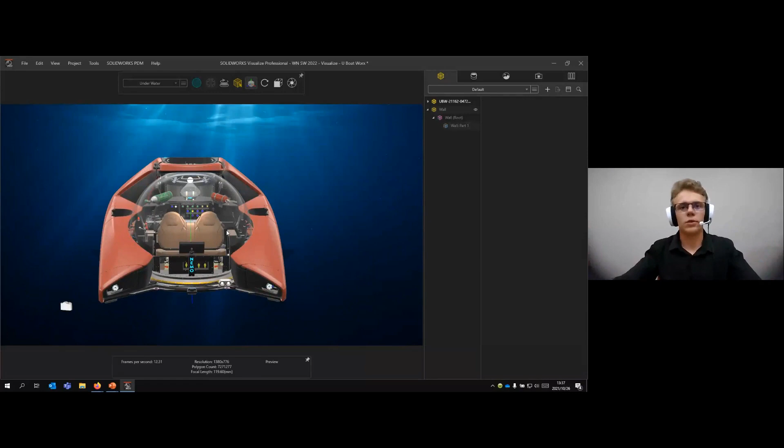Now you'll see that this wall came with us. Very, very cool. We can just right click on this wall on the model, and we're going to say hidden in current configuration. That will hide it from this specific configuration, while staying visible in every other configuration. I don't know, that's a very cool feature for me.

Okay, so we are still on the free cam. What we need to do next is adding more detail. Okay, so let's, for example, add a fish, to show you the patterning of it. Very, very cool as well. I'm going to say cool a lot because it's Visualize.

It's cool. Okay, so again, simple drag and drop. Keep everything as is, the import. And I'm now simply going to start moving it around. Again, model manipulation is still as easy as ever. Oh, that's a very big fish.

All right, so now let's just reorientate that. There we go. Okay, snap this one to the floor again.

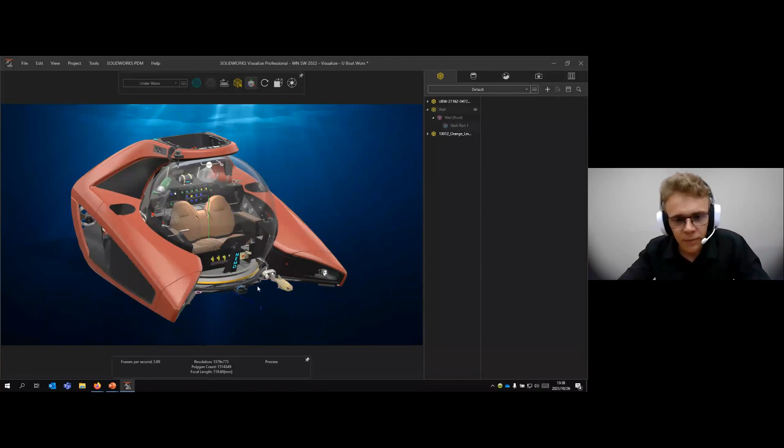Now, without creating any extra instances - because in the previous visualize versions, you could have patterns, but it required a whole list of models on the right-hand side. Now it adds a single feature, the pattern feature. So we go to the Advanced tab and click New Pattern, and you'll see it adds all of those instances, copying it across. The beautiful thing is it's not using the model data itself, just the graphical representation, so performance stays exactly the same. It's not adding model upon model upon model - it does its magic and then you're all good to go.

Okay, so again we can just move it around, set our instances. As you'll see as well, now we have the scatter type of pattern.

What this does is it just throws everything there. You set up your position or the ranges that you want it in. Say I wanted 2 mils left and 2 mils right max, and I want actually 10 objects. Now with simple drag and drop, you can change the parameters, popping it over there, keeping it like over there.

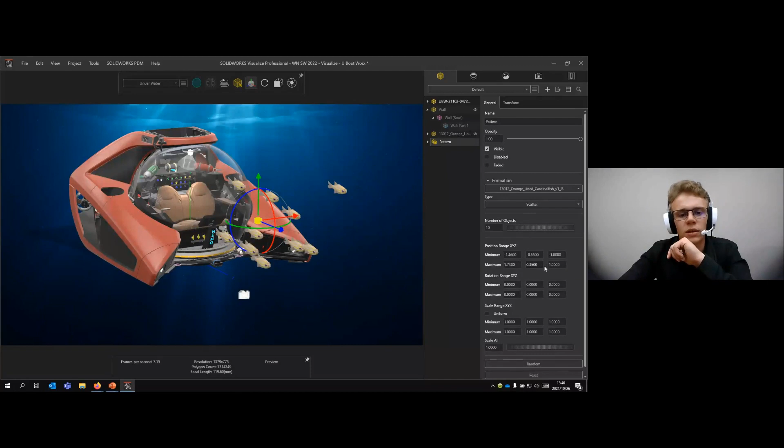Here you can also adjust the rotation to give that extra variation - it's not like a fish is always parallel to each other, so just saying.

So now you'll see every time I click random, it will randomize it until a point that I am happy with it. Yeah, obviously a bit high over there - randomize again, and we can actually bring it down a bit.

Set the model more or less like that. We can also move the entire pattern if we want to - like I want it a bit left and downwards.

Okay, cool. So now, again, you can just simply select the models that you have patterned, or one of the instances, and you can move them around independently of each other. It's still counting as a normal object in Visualize.

And pop that one somewhere up there, this one as well, and now just tidying it up a bit. And now we have our beautiful Nemo in its natural habitat.

Okay, so this is where I would go on and explain to you how awesome the animations are, what the new features are that they added, and believe me, it's awesome. Trust me, it's awesome. But I have a bit of limited time here, and I want to keep something for the upcoming Visualize webinar, again it's on the 2nd of November.

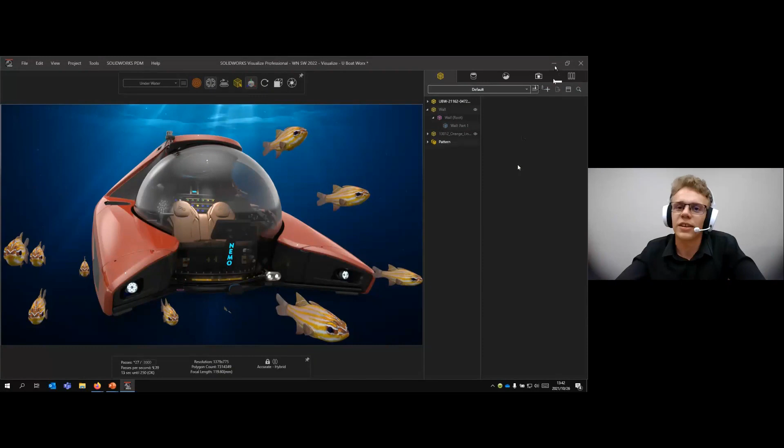So now, let's just get back to here. So, for example, like I said, I'm going to show this animation grouping, the camera switching, and the output viewer on the new webinar. Otherwise, here's a little teaser for you to look forward to.

So you can see it's going to be much easier for us to create the exploded views from Visualize itself now - no need to import motion studies just for an exploded view. So I'm going to play that again and just let it really sink in how cool it is.

Okay, and that is all from my side. Really cool, really cool - I think Visualize made a massive improvement in 2022. And again, you guys have no idea how excited I am.

All right, so let's start with Simulation 2022. Connectors allow you to simulate the desired mechanical behavior without having to create detailed geometry or define contact conditions. Since connectors are virtual, you don't need to model the actual physical 3D geometry to represent them.

A new addition to the connectors is the linkage rod. It enables you to simulate rigid or flexible behavior between components in an easy yet powerful way. To define this connector, you can choose among cylindrical faces, circular edges, or vertices. This actually came from an enhancement request submitted and voted for by users, and I know some of you will make good use of this.

In Simulation 2022, blended curvature-based meshing is now the default mesher. Blended curvature base is a strong mesher that can mesh complex geometries. Some of you may know it was introduced in 2016, and the reason you probably didn't use it is that you either didn't know it existed, or perhaps thought it was too slow. With the recent release of SolidWorks Simulation, the blended curvature base mesh has matured and become significantly faster and more robust.

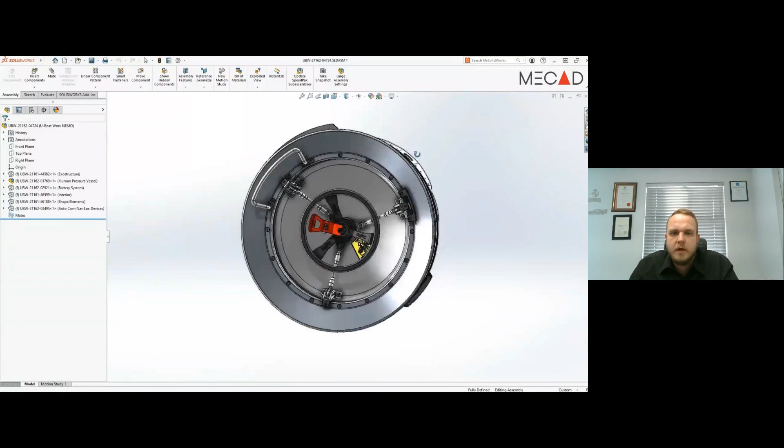The Nemo submarine uses a specialized hand wheel to secure the hatch while diving. Engaging the latch fingers requires a minimum of 500 Newtons of contact force. This will ensure almost any passenger is capable of opening this specific hatch.

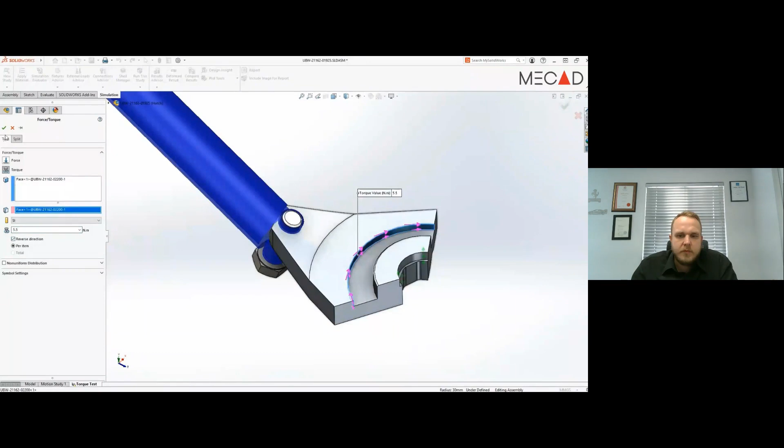95% of adults can apply at least 16.5 Newton-meters of torque to a steering wheel of this size. Since we're analyzing a symmetric model, we cut it down.

After running this analysis, we can review the shear, axial, or bending loads of the virtual linkage rod, as well as solve for the contact reaction forces developed between the latch finger and the latch flange.

So we are looking at that particular contact force. Multiplying this contact force by 3 is less than the 500 Newton requirement to properly seal that hatch. So we need to change the design a bit.

Let's try moving the connecting rod attachment 10 millimeters further away from the pivot. This should add additional contact force without requiring additional torque.

As you will see, we're just doing that contact force again. There we go. The small change increased the contact force by 38%. We are now safely past the 500 Newton minimum.

And I think that's it. As you can see, SolidWorks Simulation 2022 incorporates some serious enhancements for us to use.

Okay, next up is the SolidWorks Flow Simulation. This is one of my favorite modules, so let's look at what's new for 2022.

A lot of changes in the flow simulation plots. First, we have the flux plots. For those who don't know, flux plots let you visualize how much heat transfers from one component to another by conduction, and then the heat that flows out of the fluid through convection or radiation. Now in Flow Simulation 2022, you can display a flux plot in the Transient Explorer. A transient analysis is where the flow velocity, pressure, or temperature are changing with time.

Another useful tool at your disposal is the compare tool. With this, you can now merge plots from different projects to see critical results in one image, and also create a plot image displaying differences between two cases.

For the goals, you can also now show equation goals based on defined goals after you run the calculations or after you run your analysis.

Using probes in flow simulation is useful when you want to know the numeric value of the plotted field at any particular location. Added in Flow Simulation 2022, you can copy the actual probes with their plots that define the probes to other projects.

And then lastly is the crop region. The crop region is accounted for when evaluating your surface parameters. But let me show you this inside of SolidWorks.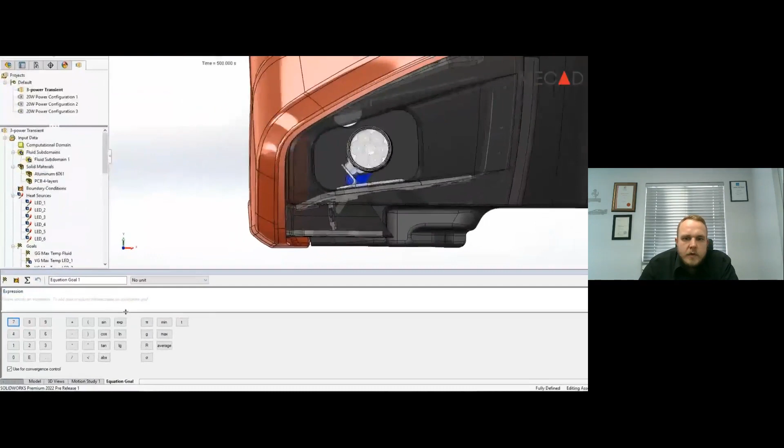We can now create new equation goals that can be created after we run the initial analysis, allowing us to process values of other calculated goals. In this example, we're going to plot the maximum temperatures of all the LEDs in the entire transient analysis.

Quick and easy. We've also run several steady state studies in a new experimental power mode, where each LED in the lamp can be set to different power settings. This experiment can then determine if there are optimum configurations that maximize brightness and minimize the heat at the circuit board.

Looking at the plots, comparing the results of 2 projects is essential to understand the similarities and differences, but side-by-side analysis and visual inspection doesn't really tell the entire story. A new merge plot option allows us to combine multiple results and highlight the overall maximum and minimum. The new difference plot allows us to display the differences from one project to a reference project.

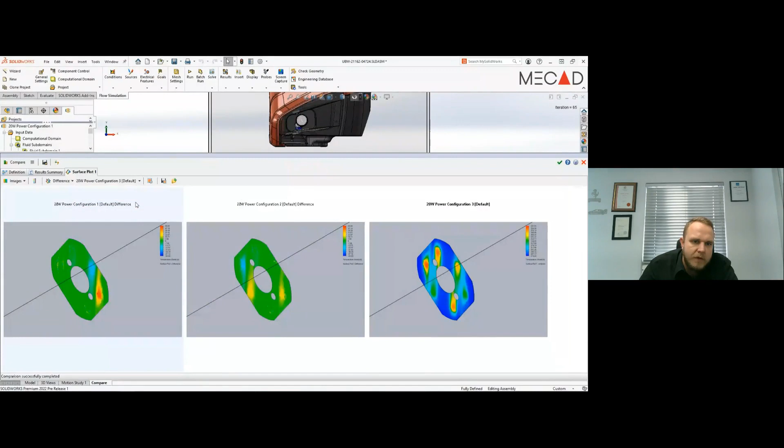Also, the results summary tabulates all the data to provide an overview across multiple projects. And then we're going back to our surface plot, which has now also been updated to store things like your model orientation, part visibility, and zoom states. Both the type of plot and the view orientations are essential to getting the full picture of what's happening inside of this analysis.

These are some powerful enhancements now included in Flow Simulation 2022, so be sure to check that out if you have Flow Simulation. If not, then get in contact with us.

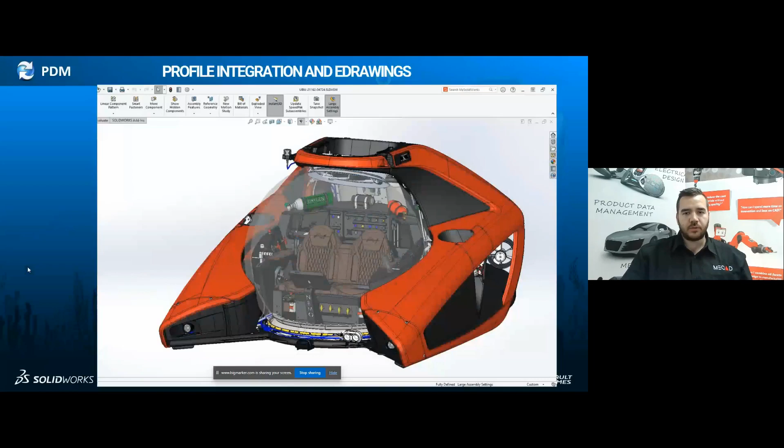So let me just quickly dive in. I won't take too much of your time — I just wanted to show you the user interface and the changes that have been updated.

With tight timelines, it's critical to know what everyone on my team is doing, from the CAD administrator to the designers. Now in PDM 2022, you can hover over your user profile picture or avatar and put in a presence note, typing what you're busy with for the day. You can do the same by looking at one of your designers — for example, Debbie Designer — and see that she's busy creating the flat patterns for the vendor. It's just a way for us to know who is doing what at what time of day.

Also new in 2022 is the transition from the bitmap preview we had in 2021. Now we have a dedicated eDrawings preview button, and with one click it loads the fully integrated eDrawings user interface into your preview capability. It's just an easier way to highlight our files and browse through the specific files that we need.

Okay, then we also have the option of using the EXALEAD OnePart search integration. We all know you want to keep your costs low and avoid creating scrap or bodies that are already created, duplicate parts.

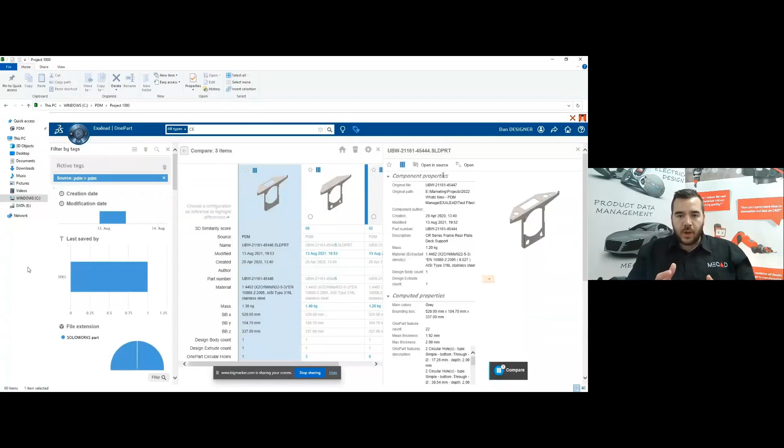With a fully licensed EXALEAD OnePart program, you can now search for your files. It will go and compare geometrically similar files in your vault, and then you can decide according to that geometry, like the mass. We want the one with the least mass, the least amount of weight. I can just click open and load it into my SolidWorks model. It's such an easier way to find all of those similar files and use them in my SolidWorks model.

Then a new enhancement, like I mentioned, is opening drawings from the PDM add-in. You'll now notice a new tab in your SolidWorks add-in, the Open Drawing tab. You can still browse within SolidWorks like you normally did and right-click Open Drawing. Now, new in 2022, in the SolidWorks PDM add-in, we can just scroll down to that specific part, right-click, and Open Drawing. So there's no need to search for that specific file anymore, and it's also independent of what that file name is in your vault.

The small changes are very important as well. From an administrative side, the user and group node is now concatenated into one node, making it a lot easier for us to do the administrating.

When we want to add new users with our Windows Active Directory, your profile pictures will pull through directly into PDM. We have a lot more options available for information and properties, so it's easy to map all of the user data to the groups. If you incorporate your Active Directory users, you can now easily rename that on the PDM side without affecting your Active Directory user groupings.

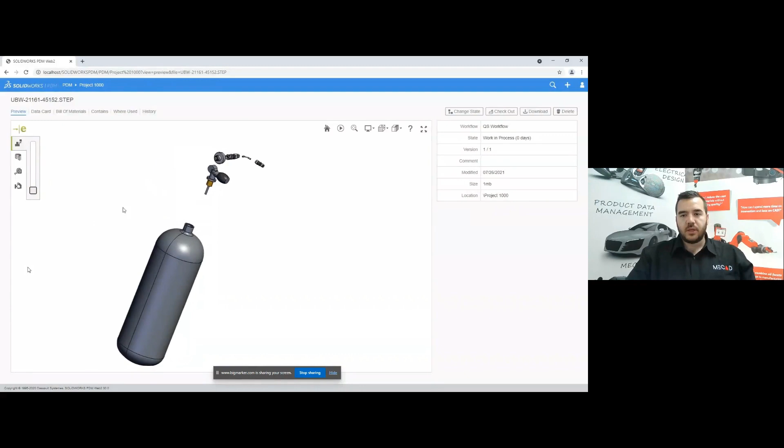With native file formats, we can load different types like step, IGES, Parasolid, STL, JT - all of those different file types can now be directly loaded with our Web 2 browser, whereas previously it was only available for SolidWorks files. Now it's got all of these new enhancements.

With regards to the data card, you can easily remove properties like project name and project number from the card view. There's a new button on the administrative side that says 'show in web card' - you can just toggle that on or off. Then you can configure the card directly like you would normally do in your XML file, and now just directly edit your data cards for the Web 2 browser. Once this is saved, it's just a simple refresh of the browser, and it will update all of your views within your Web 2 browser. As easy as that - right click, update, and you'll see it just updates that setting for us.

With all these new user controls, searching integrations, and preview capabilities, I personally feel that SolidWorks PDM 2022 is going to provide you all the tools you need to maximize your production. If you are ready for the upgrade, please contact us and we can discuss the upgrade paths. We are more than willing to discuss all of these enhancements in more detail with you.

And then I'm just going to go quickly into a few extras. There's a new option now for set variable for file names without extension. A lot of companies quite like that idea where you update your copy tree variables - we just want to set that property again.

So this is a very good enhancement. I think what's definitely clear about it is that PDM is a massive product for us and our customers, and it's vitally important to improve productivity. It's huge. So if you're not using PDM, please contact us and we can help you with that.

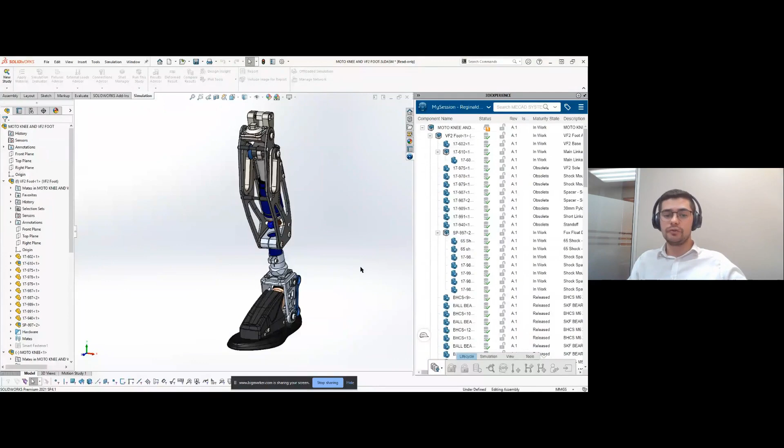Before we jump into that, I want to show you guys a bit of what 3D Experience looks like to the average user. So here we have a part you've probably seen before, the Moto Knee, made by a prosthetics company in the US. The 3D Experience add-in, many of you familiar with PDM, this will look quite similar - it looks a lot like the stuff Pierre just showed. There's a lot of cool features here pulled from the lessons we've learned from these PDM systems that have been around for a very long time.

Things like selecting items anywhere in the tree will highlight that same item on all three sides. Things like reserving items so that I'm the one modifying it. So I've made some changes to the top level assembly.

You'll see here it's telling me there's a change. So what I'm going to do is right click and reserve this item. When I do that, I'm essentially saying this is my item, I'm going to modify it now, kind of like check out in PDM. So I made those changes, all of that.

All you have to do to save is right click, save, and this will upload it to the cloud file. So we don't have to drop it in a special folder or anything like that. This will sort out all the references, update the files, keep track of the revisions, and make sure we have an effortless data management system.

So with that done, it's just finishing up the final few steps. While we wait for that, I'm going to switch to the browser side. 3D Experience, because it's cloud-based, a lot of the functions can be fully accessed from the browser, and that's what makes it so powerful.

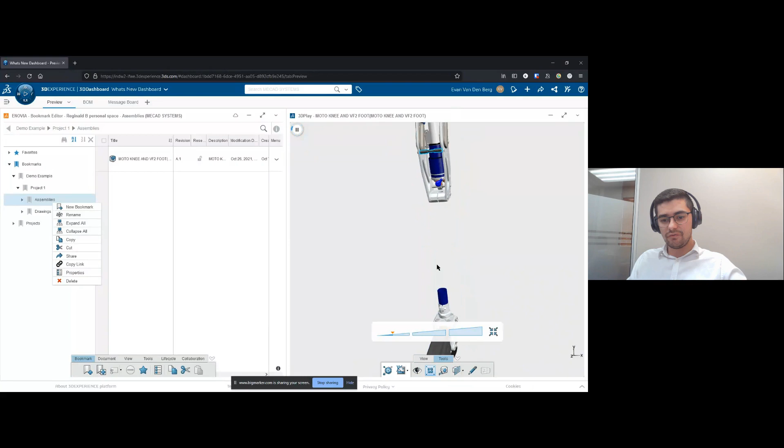So even if you have users with non-CAD laptops that need to view files, here I'm viewing that exact file we were just looking at directly within a browser. I can zoom, explode this, look at individual parts, move items around as needed, and even measure, section, and annotate this, all from within a browser and all with the base level of access through the experience.

Even on the left-hand side, I've organized this folder structure that I share with the rest of my team. So if they want to view a certain item, they can just drag and drop, and the item will load on their side, and we can preview anything on the platform saved to the cloud.

So there we go, we can inspect this drawing and go ahead and look at the BOM and so forth. Now perhaps I need to look at the BOM in more detail for the entire assembly, so let's jump into my BOM tab here.

Before I do this, I just want to show you guys that you can actually customize your 3D experience interface, and that's one of the most powerful things about it. We can take the design and the system we have here and build the interface and workflow we normally use in your particular company, rather than having some programmer who worked on this somewhere in Europe decide how your items work. So let's take something like that preview widget we had, and we can just drag and drop that into the interface, moving things around as needed. Lots of customizability here, and really powerful tools.

So I'm just showing you the smallest bit of 3D experience here today. If you guys have any questions, feel free to ask, we'd be happy to sit down and go into more detail.

So here on the cloud side, I can see the full assembly BOM. I can expand these items, look at everything related, and add additional columns here to look at things like mass and so forth. Really, really powerful tools here. So your ordering team, and all those viewers you usually needed to open stuff in eDrawings and so forth, all of this can be done from within the cloud.

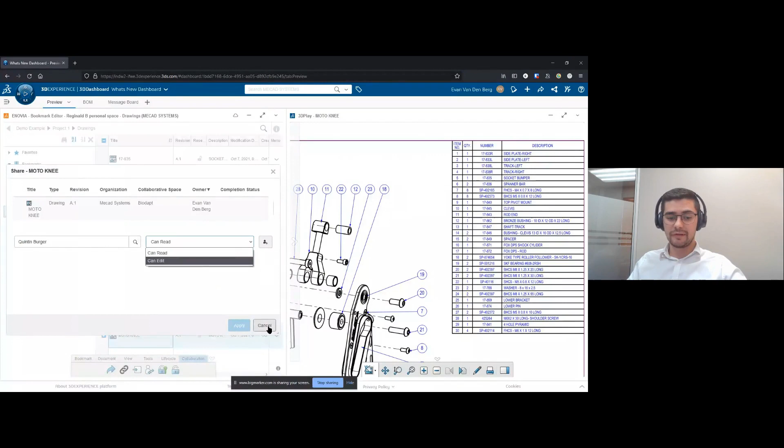Now lastly, just to address some of the collaboration things, there's a general pervasive view of being able to share items. So if I select an item here, I'll be able to go to my collaboration tab and just share this, or create a link and send it to one of my colleagues. So for instance, I could click on this, share, type in Quintin's name right here, and have him view this file on his side without any issues. I can even give him the level of access directly from here.

On the collaboration side, continuing that, we have access to these message boards. Message boards are a really good way of keeping track of information, making sure everything you do and see is done in such a way that you don't have to have constant meetings and constant updates between members to try and keep track of what's going on. You just pop in on the message board, see what's happened, and you have a good idea of what's going on.

You can even direct message some of your colleagues. So let's send a message to Pierre, telling him, great PDM, what's new?

This will pop up as a notification within his SolidWorks 3D Experience interface, so he doesn't have to have this browser side open. Many of the things I've shown you, the preview, the BOM, all of that, you can open on the SolidWorks side as well. We can even give him a call right now if we wanted to screen share and talk about these sorts of things.

Now I'm going to switch back just to my slides and go over a few more things. I've shown you some previews of various other features, and I just want to talk around what some of these features also have available to them.

So when we're looking at the data management side, it's very scalable. You just buy licenses per user. You don't have to upgrade hardware as your user count increases. Since it's all cloud-based, it scales with you.

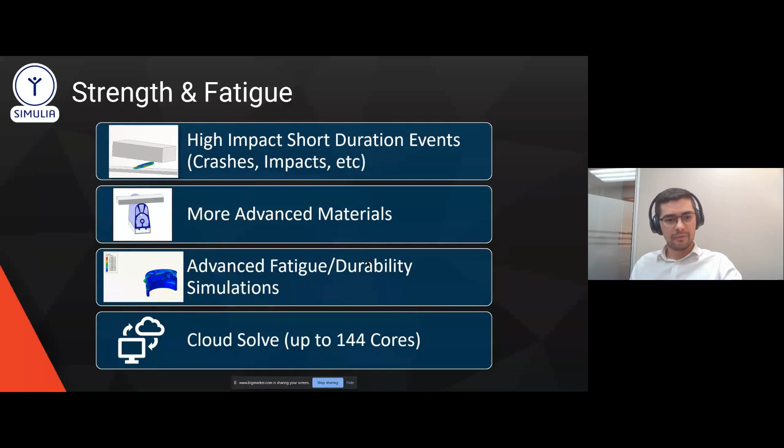Seems I've gotten it stuck.

But all of these simulation tools can also pull from cloud solve capabilities. So many of you have laptops or desktops that are quite powerful, but sometimes the simulation just takes too long. You can expand that with the Simulia portfolio - take your simulation, push it to the cloud, up to 144 cores. Even with the base simulation licenses, without purchasing additional cloud credits, you can already run cloud simulations - 8 cores on the strength analysis side and 16 cores on the flow analysis side. There's even electromagnetic and plastic injection simulation on the cloud, so if those are particular needs you guys need, you can also pull from those as well.